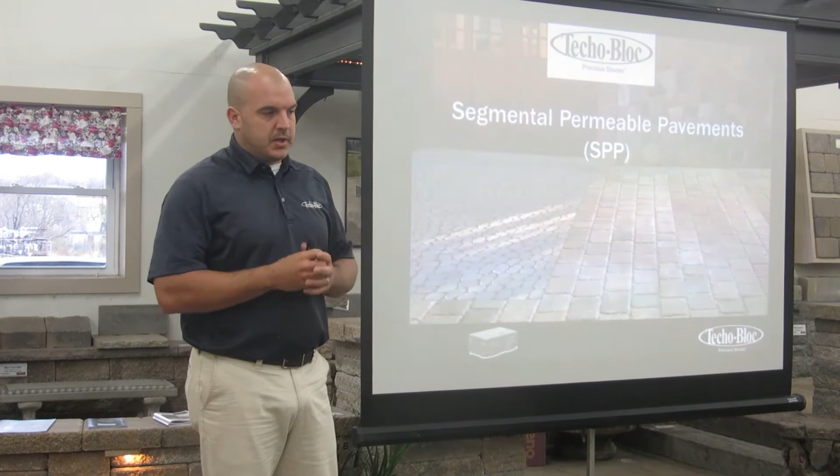Today, we're going to talk about segmental permeable pavements. This industry doubles, if not triples, every year, and will continue to do so. 15 years from now, there's probably not going to be a commercial job installed, a parking lot, that doesn't have some part of permeables in it. There's just too many benefits for it, which we'll get into today.

Why are we talking about this? Why is permeable pavement such a big thing? You guys are going to have to answer some questions today. This is a hands-on demo today, remember that. No, there is a hands-on.

But why, in all honesty, is permeable becoming such a big thing? Stormwater problems or runoff problems. Exactly. Runoff problems are what we're having from increased building. We're building new streets, new parking lots, new buildings, all the rooftops, all the asphalt is impervious coverage that now, when we get a rain event, instead of draining into the ground, it's running to our waterways. With it running to the waterways, it's getting too much, so we have erosion, it's carrying pollutants, so we're contaminating it, destroying it. So that's why permeable pavements are so big, and the industry's growing so fast, and it will continue to do so.

Locally, guys, in Lancaster, we are part of the Chesapeake Bay watershed. Lancaster City signed a big initiative to reduce stormwater runoff because we are in that Chesapeake Bay watershed. So you guys will start seeing this. I see some familiar faces that we've done some meetings with the city with. So it's here, and they're looking for guys to do this stuff and do it the right way, so it performs locally. And typically what happens is once they start going a couple and see the benefits, they're just going to mandate it everywhere, because there are so many benefits.

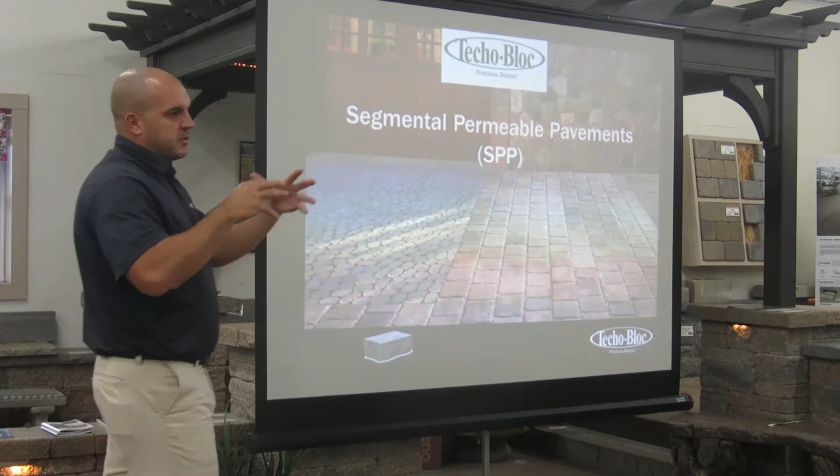There's a lot of cities in North Carolina, Asheville's a big one, but North Carolina State University is doing testing all over the state with the soils and all that. So now it keeps getting passed. In Charlotte, they're fighting it just because they haven't done one yet, but as soon as they do it, they'll start going. Chicago, I think, is up to 19 miles inside the city limits of alleyways that are permeable, and they have 100 scheduled this year. It just keeps going. So if Lancaster's already started the ball rolling, you're just going to see it keep increasing.

From the big cities, Philadelphia right now, all businesses are getting taxed on their runoff. All water that flows off their property into the stormwater system, they're getting taxed on. That's going to start increasing to the suburbs and eventually branch out to the homeowners too. So this is something we all have to be conscious about.

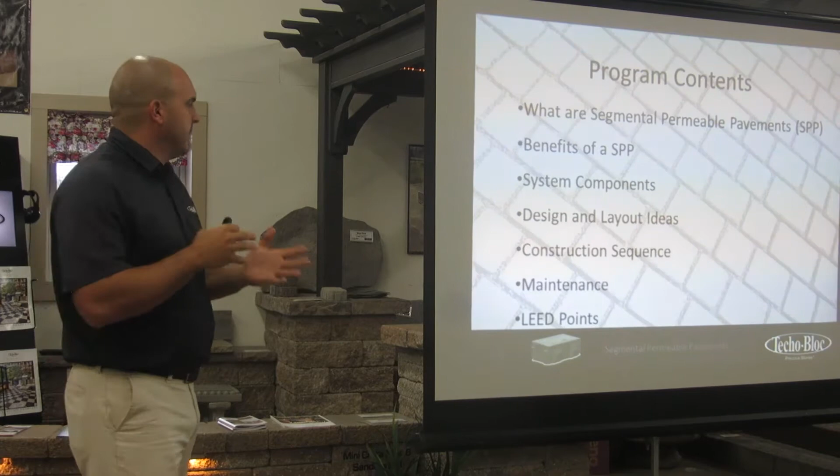So this program, we'll define what we'll call SPPs, segmental permeable pavements, the benefits, the components of the system. We'll go into the design layout, the construction sequence, maintenance on the system, and also LEED accreditation for different projects.

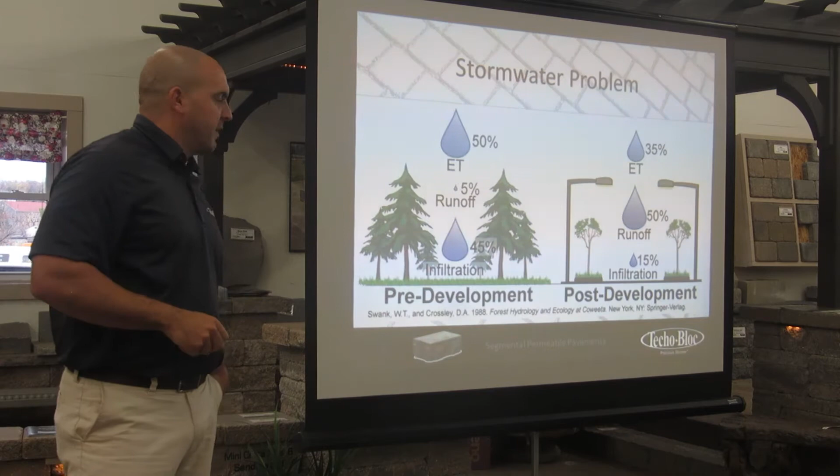So here's what we're talking about. On the left, you'll see what they call pre-development, before there was stuff built or impervious coverage built. But you have ET, which is evapotranspiration. That's water that's going to come back out of the ground from evaporation and through the roots back to the leaves and back into the air. You notice with pre-development, there's almost no runoff, it's only 5% because it drains through the ground. And then 45% of it infiltrates back, recharging our groundwater and actually cleaning the water as it does it. As it goes through the soil, it gets filtered and cleaned.

When we get to post-development, you can see the big thing here is runoff increases 10 times. 50% of the water now is just ran off, sent into stormwater management systems, sent right into waterways, causing erosion, all different types of problems as well.

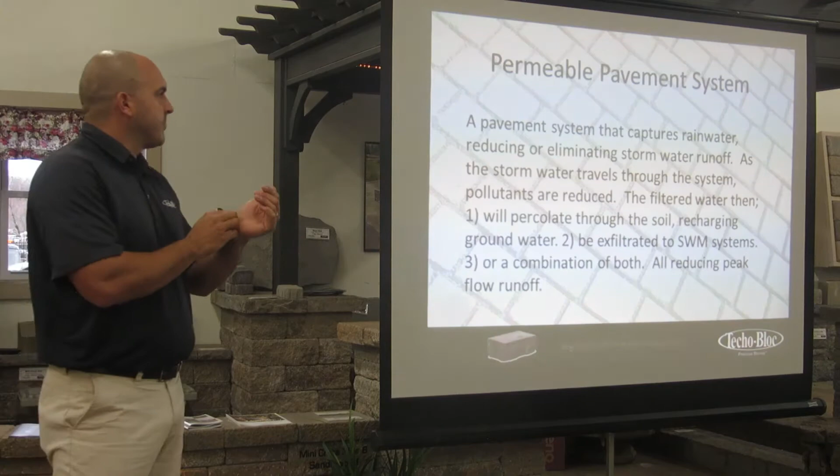We're going to read this, it's kind of a long description, but it's very important, so I'm just going to read it verbatim on what's on the screen. The definition for a permeable pavement system is a pavement system that captures rainwater, reducing or eliminating stormwater runoff as the stormwater travels through the system. Pollutants are reduced. The filtered water then will percolate through the soil, recharging groundwater, be exfiltrated to stormwater management systems, or a combination of both, all reducing peak flow runoff.

You guys understand what that means? Normal pavement, all the water is pretty much running off, shedding off. Permeable systems can capture almost all the water for lower intensity storms. And we'll go through the components and you'll see how it helps reducing that peak flow.

Sustainable design is development that meets the needs of the present without compromising the ability of future generations to meet their own needs. It's like the camping saying: leave it better than you found it. In the 70s and 80s, during industrial growth, we didn't care about this—we just built as fast as we could, screwing over the next generation. Now we're making sure that when we build, we're not destroying Mother Nature, so future generations can live off the land as well.

Stormwater management objectives include water quantity—accommodating overall water volumes and peak flow. We're trying to deal with the biggest storm possible. We need to contain that water, clean it, and exfiltrate it later on after peak flow, once all the water has gone through the stormwater system.

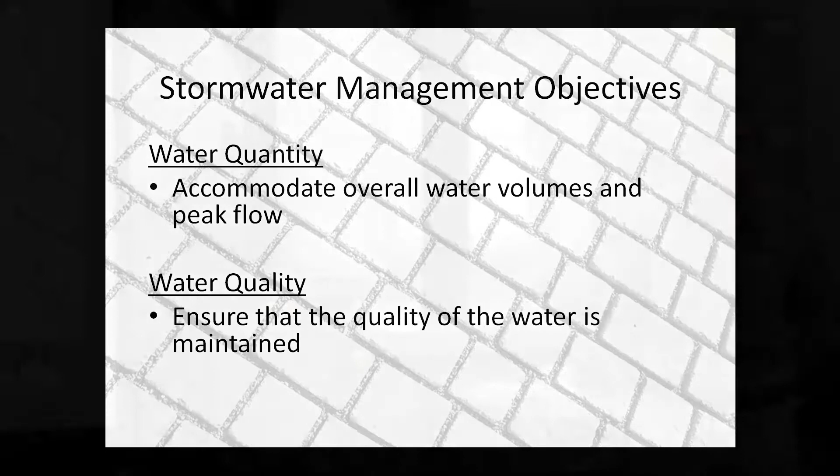The other important objective is water quality—ensuring it's maintained. There have been a lot of tests on these systems. The stones and microbial organisms eat bacteria, suspended solids, nitrates, and all kinds of pollution. They do a great job of cleaning the water.

Asphalt is an impermeable surface—all this runoff carries petroleums, heavy metals, and phosphates down into our stormwater system. Let's go look at a permeable pavement. I'm standing on a permeable pavement system, Permea from Techo-Bloc, looking for runoff during a rain event. There's none. All the sediment, petroleum distillates, heavy metals, and phosphates run through the system, filtered through the aggregate, down into the water table where they belong. A permeable pavement system—no runoff.

This video shows the difference in runoff with permeable pavement systems. There are about three slides of benefits—there's just a ton of them. Like mentioned before, once cities like Lancaster start seeing the benefits, they keep adding more and more.

It meets stormwater regulations as part of best management practice. We met with the DEP here last year—they have a manual about 200 pages long covering stormwater regulations in Pennsylvania, but there's only half a page for permeable pavements, and it's not even written correctly. They still have a lot of work to do to make it easier for engineers and municipalities to specify this. We talked with them about it, showed them everything, and did a presentation. I think they'll update it next year—they revise it every 10 years or so, and once that goes through, it'll help get more of this passed.

Another great benefit is it reduces runoff. Most low-intensity storms, no water will leave the system at all. It lowers our peak flow volumes, which reduces erosion.

Where I live in Charlotte, the development was built in 2007. On each side of my house is a culvert, so I have right-of-ways that are just drains off the road, going in behind to a stream behind my house. That stream is probably 7 feet deep, and there's probably normally 6 inches of water in it, just because all that water has eroded it and made it that deep.

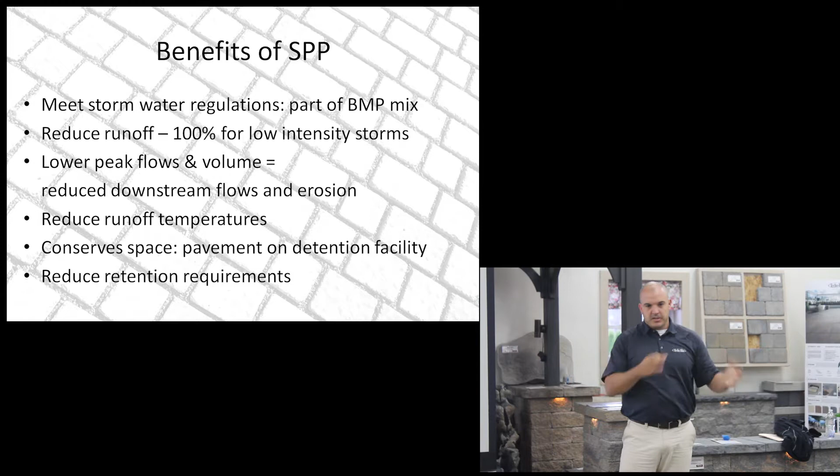Now when we get a rain event—we just had rain for about the last 9 days, but when it's too heavy, it floods. My whole backyard floods. That stream fills 7 feet high because all those houses and all those roadways are ran right to those inlets, right to that stream. It just keeps getting bigger and deeper. These permeable systems will reduce that.

It also reduces runoff temperatures. Think about a Walmart parking lot in the middle of summer—you drive on it and you can see that haze. That asphalt's extremely hot. Now think about a rain event: rain hits that, heats up that water, and sends it right to a waterway or stream. So it starts killing the fish and plant life in the stream because of the elevated temperatures.

As it works its way through the permeable pavement system, it allows water time to cool and helps reduce the temperatures. It also conserves space. Rick, you have a good story on that one?

Yeah, we did a big project up close to the Delaware River. It was about 85,000 square feet of permeable pavement a couple of years ago. I see some of you guys smiling—you'd love to have that job, wouldn't you?

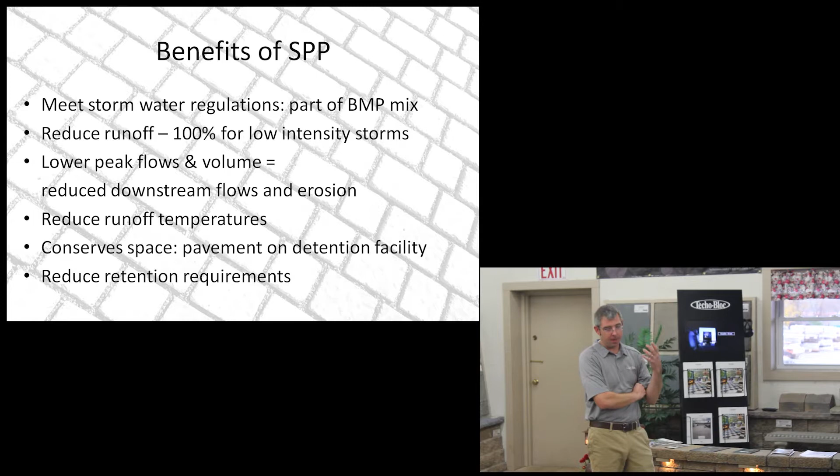But it was right on the river, and there was a lot of issues with clean water, so they needed that water to be cleaned when it was going out dumped close to the river. Another reason—they had a huge impervious coverage issue. They only had 20% buildable land, so they weren't able to build enough for their depot. By doing permeable pavements, we were able to clean the water, get more buildable space, and they had their detention area actually stored under the pavement. It was a really great project.

They needed a parking lot so big, but they also needed a detention pond. The site didn't allow for both, so they combined it—the detention pond is underneath the permeable pavement system. It was originally spec'd for permeable asphalt, but they found out the load rating wasn't enough to handle tractor trailer traffic, so we got it switched to permeable pavers, and it worked out really well.

More benefits: it contributes to maintaining hydraulic conditions. What that means is it allows the water to drain back through the soil, recharging our groundwater and purifying the water as it goes through.

Filters and reduces pollutants also. Like we said, the stone does a great job with those microorganisms, breaking down that bacteria and stuff that's coming through the system. Fewer drainage inlets where you're normally going to need a lot of storm drains and places to run that water. Permeable pavement, the whole pavement is a drain, so you're not going to need as many, maybe a couple potential overflow drains just in case the water comes up too high.

Reduces wastewater treatment costs. Again, you're not running all that stormwater to be treated.

It's visually more attractive than alternatives, so pavers are going to aesthetically look a lot better than asphalt or concrete, anything else like that. And it's an internationally proven system. We're not just pushing this in Eastern Pennsylvania, it's all over the place, all over the world. We're doing a lot of catch up as far as the U.S. integrating these systems. Other countries are leaps and bounds ahead of us as far as using permeable pavers.

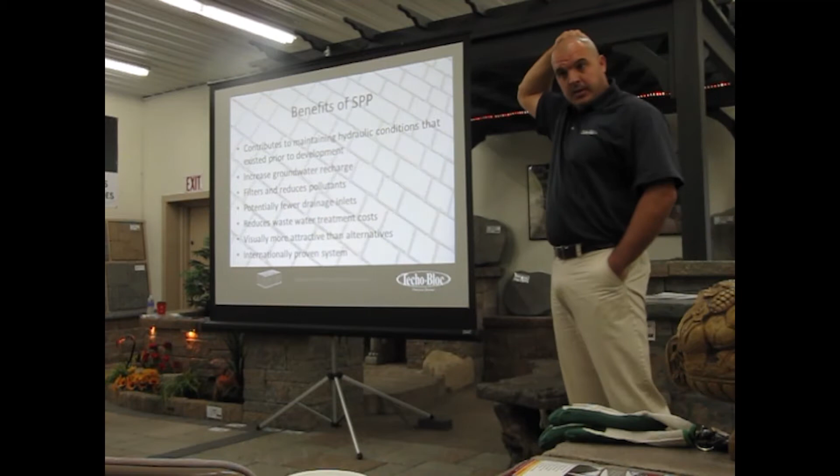This one here, I think, is important, especially to Lancaster City. They're having a lot of problems with it flooding. So they built these water treatment systems 20, 30 years ago to handle what they thought was going to be built. And now a lot more has been built, so to replace it is not an easy fix.

It's the inlets we see on the road, which is then piped under the streets. So to fix that means rip up every street, and it's in the hundreds of millions of dollars to do this. So what are they going to do? They're going to start taxing, like they do businesses and residents, for the lot sizes you have, making you do permeable driveways or you get taxed on it, stuff like that, because it's such a big expense. It's not a quick, easy fix, it's in the hundreds of millions of dollars to fix it.

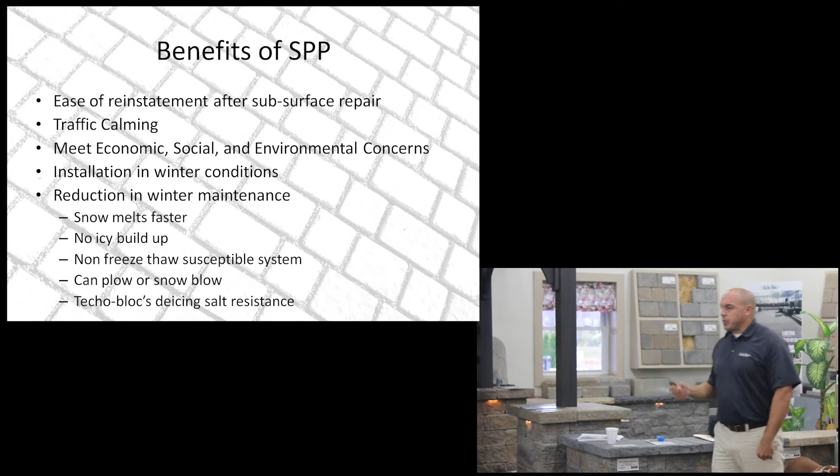Other benefits: ease of reinstatement. Obviously it's just like anything interlocking, we can pull the section out we need to if we need to do repairs underneath. It gives traffic calming. When you see those big segmented pieces and the joints in between, people automatically slow down because you're expecting it to be bumpy, and then it does make a noise. So they don't even recommend it be installed where the speed is 35 miles an hour maximum, because of the sound it becomes so loud in the vehicle going over it. So it does traffic calming, and meets the economic, social, and environmental concerns, which we'll get into.

A great thing for this climate is you can install it in the winter. We're using all open graded aggregates, so they're not going to freeze like the 2A modified, 2940 stone would. It's open graded stone, so it can be installed. If it was raining today, we would still do the hands-on because you can install it in the rain. There's no saturation of the stone we're installing when we're doing it, unlike with your crushed stone that has fines. It can be installed year-round.

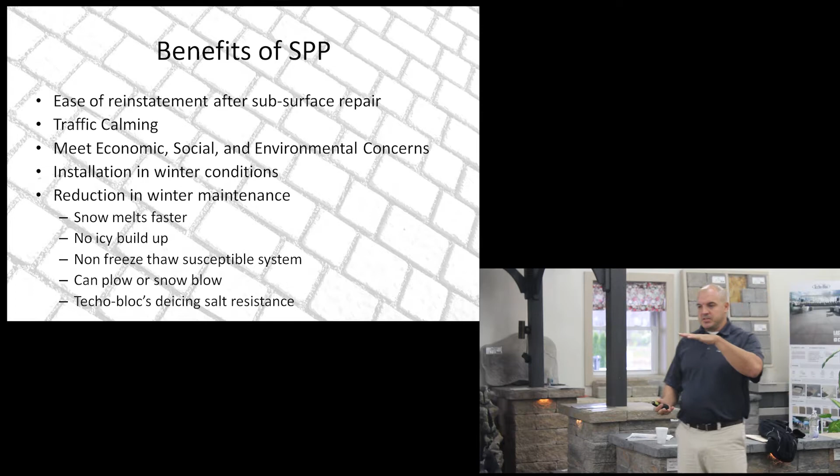It actually reduces winter maintenance as well. How many guys plow in the winter, how many guys do the salting with it as well? Well, with this, we get ice because it melts and then freezes. With this system, as it melts, it'll drain through the system. Typically for commercial applications, the base of the system is probably around 2 feet. They've done research, I think in Chicago or Wisconsin, and we'll get into the different layers, but the sub-base never got below 36 degrees, the base layer never got below 34, and the bedding layer never got below 32. So it never got below freezing. It always had air underneath circulating with the geothermal temperatures to help melt the snow on top and come down through it. And you can plow it, you can salt it.

The only thing you don't want to do is put sand in it, because that can clog the system. You can actually put the joint fill material right on top of it, the same material we'll use today to give traction, and it'll just fill back in.

I got a question. How about, like in the city now, they're starting to put in the melt-the-snow systems. How would this work with that? Because of the installation they put in, how's the water level run? You talking about a heated element, a heated system?

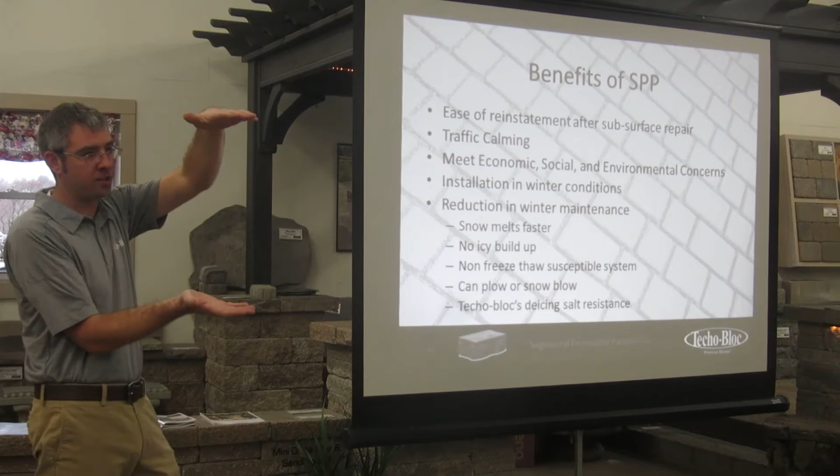We did a showcase project with it a couple years ago. It's not needed as much because with some of these systems you have 2 feet of excavation, and what you get is a geothermal effect. The ground 2 feet deep is a lot warmer than it is at surface temperature, so that heat will actually rise through the open system and help melt some of the snow in the joints. It's not going to melt a foot of snow on top, but it does help.

That's what I mean, when they're installing that, how's this drainage going to work with that, because they're putting concrete over top of that and then setting the pavers? You could lay it in clean stone - that membrane or that mat could lay in clean stone. You could put it in the open graded aggregate. That's what we did when we did that project.

Yeah, go on our YouTube page, there's some videos on that project. I think we did it about 3 years ago, I believe.

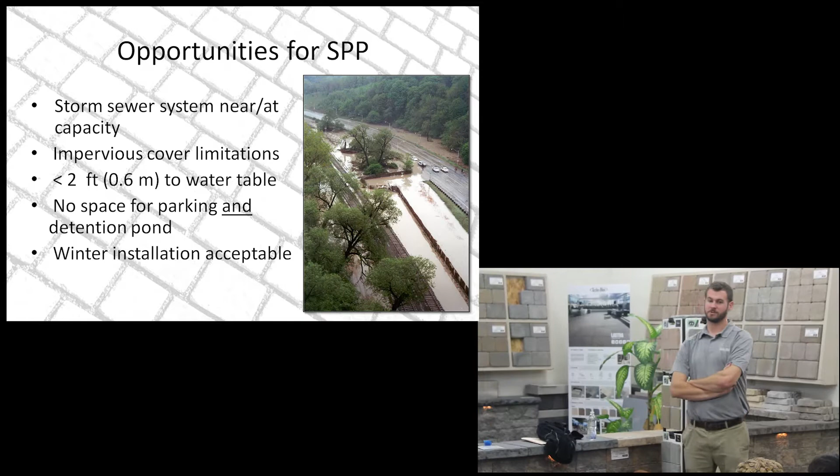Some opportunities that arise: storm sewer system at capacity, which I think is what Lancaster's run into - it just can't take the water anymore because of the development. You meet your impervious coverage limitations, which Lancaster's passing as well. There's different municipalities in the area, anywhere from some will give you 50, 60, up to 80% usually back on the lot. And when we did a lot of installs in Mechanicsburg and Carlisle...

Mechanicsburg had a lot of those. They built these huge houses on these small lots. People couldn't put a patio in their backyard once their house was built and their driveway was in, because they met their limit already. I think Silver Spring and Hampden, over towards Harrisburg, it's 30% impervious that you're allowed.

So they're saying that 70% of your lot must be vegetative. So you've got to remember, if you're installing permeable pavements, getting back that percentage, you can install or build a pool or build a shed or put whatever you want on your property. You're just counteracting that impervious coverage.

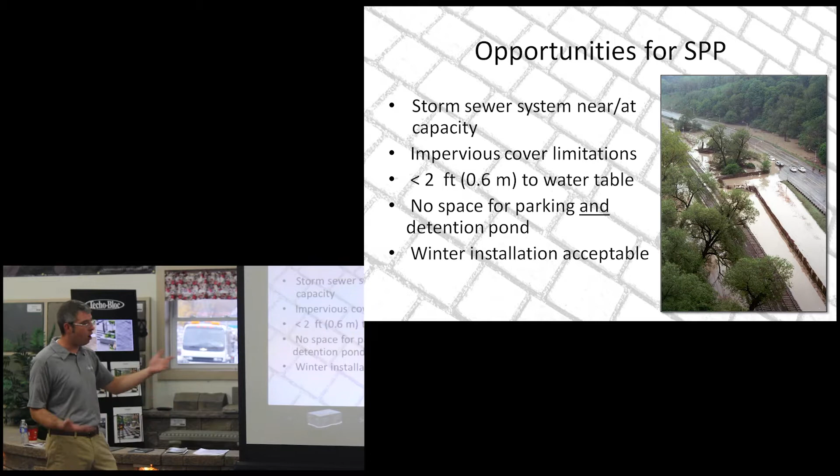No space for parking and a detention pond. You see these big properties, they have to have an acre for a detention area, chain link fence, weeds growing 8 feet high. All that water can be stored underneath the pavement, so that can actually become usable space for some of these developers, which is a great thing. And like Jesse said, winter installation is more than acceptable because you're dealing with open graded aggregate.

What we have here is an overhead view of a typical permeable pavement system. There's a couple things too that we recommend a little bit different than some of the other manufacturers in the industry. We recommend having an elevated curb along the outside, and that's there for a couple reasons.

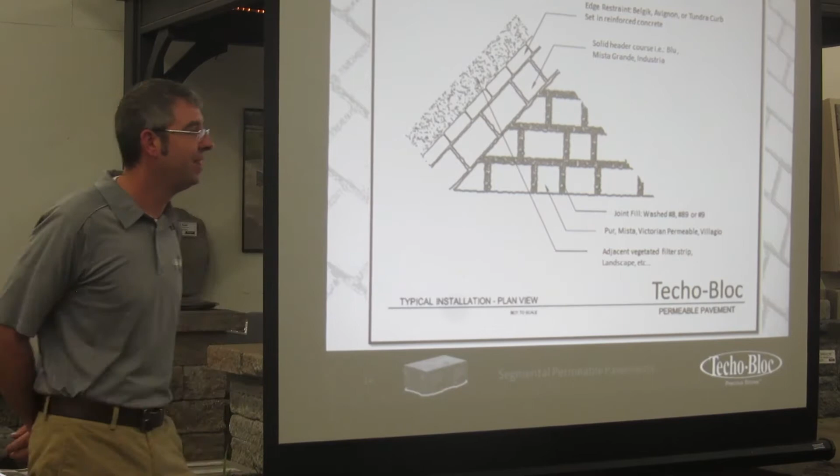Number one, when you're dealing with clean stone, you can't drive regular PVC type edging in place, just because you have open stone - you can take that spike and push it in with your palm. So you need to have either some kind of a concreted-in curb or a full bed depth curb encapsulating all that system, because if you can push it in with your palm, you can pull it right back out, so it won't hold anything. It will not do good as an edge restraint.

Yeah, go ahead. So even that grid with an edge piece on it, I used that on one job and I don't think that holds either. It's kind of hard to work with because that has a memory, like when it comes rolled up, so when you try to pull it out, you've got 4 guys trying to hold this thing down as you're putting pavers on top of it.

That might work out better for maybe some walkways, non-vehicular traffic. But we always try to recommend some kind of a concreted in curb, especially with any type of vehicular traffic. That type of stuff for walkways may work, but it may be too time consuming to even mess with. Most of the time it's going to come down to concrete or using a precast curb reinforced with concrete or rebar behind it.

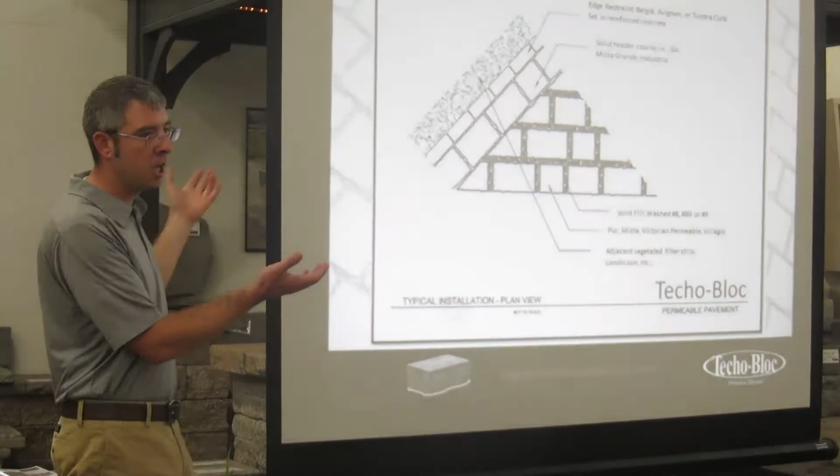The other reason we recommend an elevated curb is because what's going to be behind your system could be grass, could be mulch beds, could be flower beds, could be anything. When they're doing maintenance on that, there's always the potential to blow stuff into the system. And that's the biggest thing we're trying to prevent on permeable pavement systems, is not getting grass clippings or any kind of debris into the system, because there's potential to clog that area.

Something else we recommend is a solid, non-permeable header course along the outside. You guys ever see curbs? Where does the debris and dirt and dust and grass clippings always collect? It always collects against the curb. Especially this time of year, leaves will just blow and get trapped right there. By having a non-permeable border on the outside, a tighter joint product, there's a lot less chance for that sediment to get into the system.

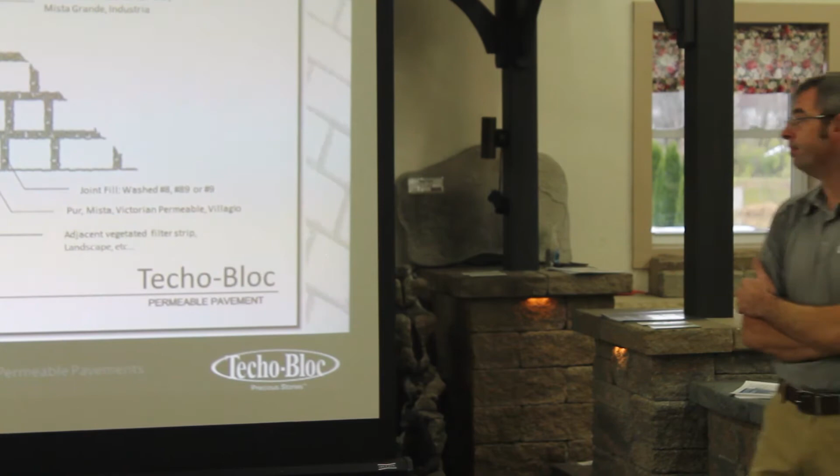So starting off the system components, the difference between this and interlocking concrete pavement starts at the very beginning. Because typically, if this is interlocking concrete pavement, what are we doing to our subgrade soil? It's the first thing we're going to do. When doing standard interlocking pavements, you always compact the soil.

Obviously, with permeable pavements, you don't want to compact it. You guys know why you don't compact it? If you compact it, the water will puddle. Yeah, it pretty much tightens up those clay particles or soil particles, so it lowers the infiltration rate of that soil. When we're doing compaction, what we're actually doing is mechanically tightening that and getting all the air pockets out so we can start compaction from the base up.

We want those air pockets. We want that water to be able to drain down back into the soil. So we don't compact. You can also do what they call scarify, where they take the teeth of your backhoe or skid loader and drag it back to cause grooves, which creates surface area to allow more water to drain in. I think they did this on the outside project here. We'll pull it back and get to see it. So that's where it first starts different.

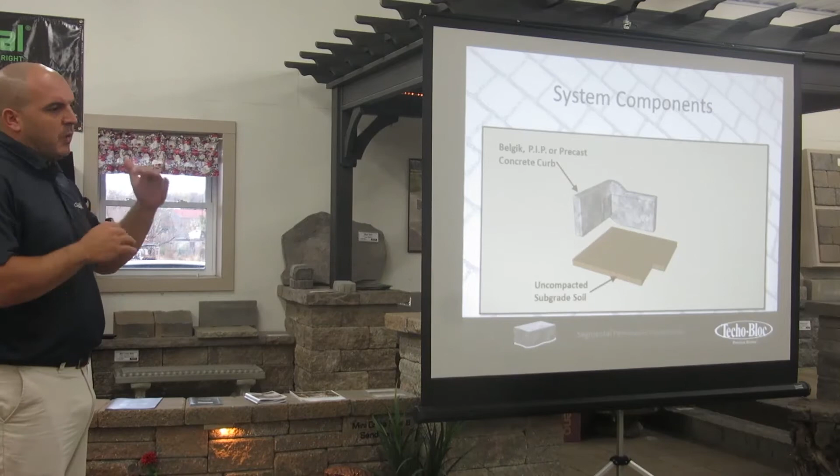Next is this curbing. Depending on what you're doing, typically the curbing's not going to go down actually to the sub base. It'll probably be above the sub base, depending on what installation we're doing. If it's a high traffic commercial parking lot with a lot of ESAL loads on it, it may go down that far, probably a minimum of 12 to 16 inch curb that they put in. If it's a residential driveway, obviously it probably doesn't need to be something near that thick. A walkway wouldn't have to be that thick as well.

Next thing is geotextile. We always recommend using a woven geotextile fabric between the soil and the stone. Geotextile fabric is there for two reasons. Number one, it prevents that soil from mixing with your stone. Number two, it has some biaxial holding capabilities too, so it has strength in both directions. If you get some minor settlement because you're not compacting that soil, it's there to help bridge those areas.

And with permeables, there's actually a third reason it's put in. That fabric, and we'll see it out here, is a filter layer. So bacteria will grow on that. There's a guy, Brian Shackel, who wrote a book years back on the study of permeables, and in it, that fabric grows bacteria, so now it becomes a filter layer. As the water is going through, it's going through that bacteria, and that's what's eating the pollutants and stuff as it goes through. Think of it like a pond filter or something like that.

You know, you put those chemicals and bacteria in for your ponds. It's kind of a similar idea.

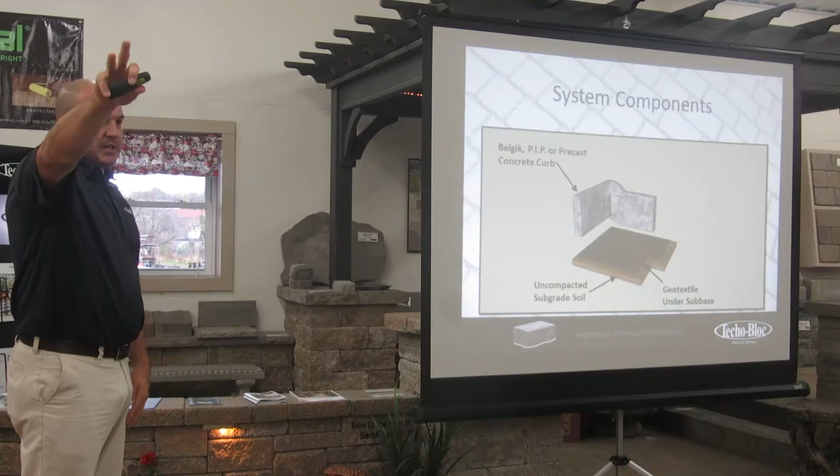There's different types, and it's important. Mirafi, who makes it, I have a sample set of it. They probably have 9 different types, and some say right on it, just for separation, not for infiltration. So you've got to make sure you're using the right type.

Another thing to remember about these systems is they usually have an engineered drawing, because the sub base changes depending on traffic and what we're trying to do. They'll specify exactly what geotextile you should use, and the depth of your sub base, if there is one. It's not just like your typical patio.

If you're going to do residential projects here, get it done once, because your soil conditions are typically the same. So you can use it for all the driveways and patios you do. Get it done once, have it, so you know you're installing it right for the soil conditions.

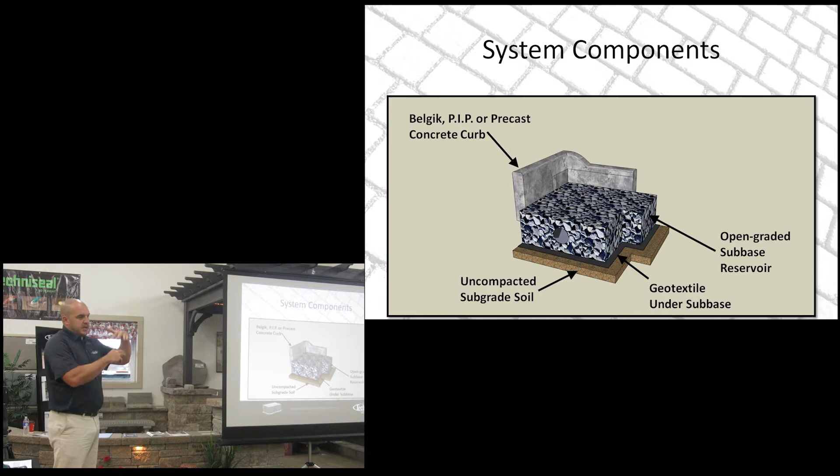Next, this is our sub-base, a number 2 to 3 size stone. This is what varies in base thickness of the installation, and what determines its thickness is soil conditions, what type of soil, loads that will be going on top, the amount of ESAL loads, or what type of traffic it will be. If we're trying to store water in it, we'll determine how thick we build it. I think that's probably about it, but yeah, this is what varies in the system, the sub-base.

This can be somewhat difficult to find. 2s and 3s can be hard to find washed. All the aggregates we're dealing with, we want to make sure they're washed, just because you don't want to put more fines into the system - you don't want it to fail prematurely from dirty aggregate. So check with your local quarries and suppliers to make sure you can get this washed.

A lot of projects I've seen actually substitute 57 stone for the full layer instead of using a sub-base. If you're doing residential projects, that's probably what you end up doing - just a 57 base layer, maybe with an intermittent layer of geotextile or biaxial grid in between to help stabilize the stone. But like Rick said, this is almost impossible to find washed - we'll go out today, see the rock they have, pick one up, and your hand will be covered in dirt. They're just hard to get washed.

What's the percentage void space on a normal 2s and 3s? Is it 35 to 40%? They want it to be 40, but it ranges 35 to 45. I think you're allowed down to 32, but they prefer right around 40.

What is 57 then? Same - it's just the size of the rock. And typically the question he asked, what's the void space, is very important. It's typically between 35 and 45%. They want you close to 40 if at all possible, to allow that water in.

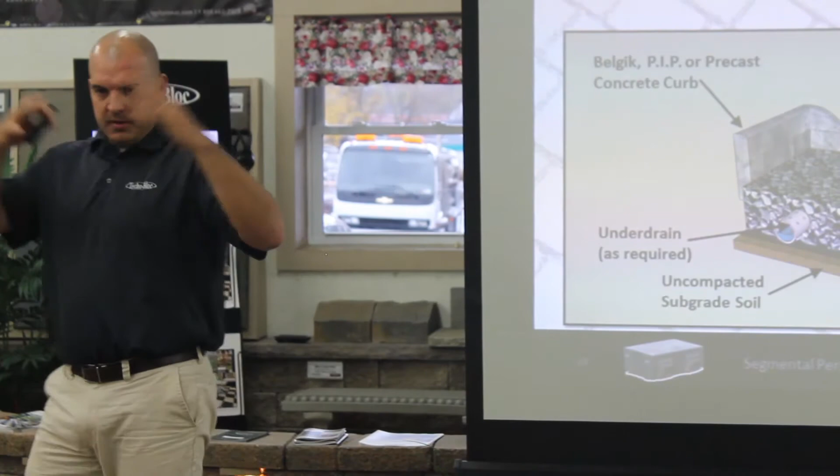And those void spaces are what allow us to install it in the winter and stop it from heaving and breaking down like asphalt does. Because as water gets in the system and freezes in those voids, it's not pushing the rock - it'll actually freeze in those void spaces without causing it to move.

The quarry you buy your aggregates from can provide a report with all that information - not just can, they have to. If they're selling it as 57 stone, they have to have the report on it with the gradation.

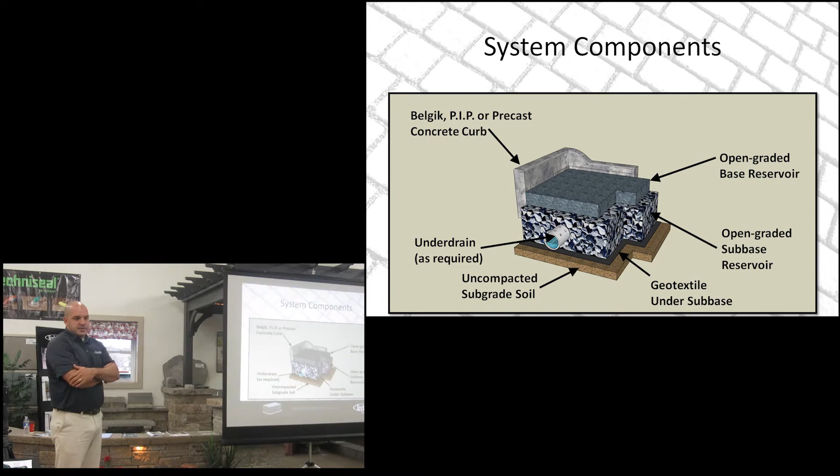Next that can be installed is our base layer. This is typically 4 inches, and it's a number 57 stone that they put in.

Here, what you can do is actually put in between these two layers another layer of geotextile fabric, because we're going from a big size - the 2s and 3s is probably about the size of my fist - down to 57, which is 3/4 inch stone.

So they're going to weave in between and fill that, and they'll eventually choke out. They call it the choke factor of it. We just don't know exactly what that will be. So we need to compact to get that to choke out, or we can put a layer of geotextile fabric in between it, and then we know it's already at its choke point if you do it.

So there's 2 different ways you can do it as well. Optional biaxial grid and base. This isn't just a regular geogrid. They're specified sometimes as a geotextile with the geogrid attached to it, but this is an engineered product. If you're dealing with that, you're definitely going to have this project engineered. What that does is it provides some more structural support in that base. Maybe if you had some more load you had to deal with, additional traffic, that might be something an engineer might include.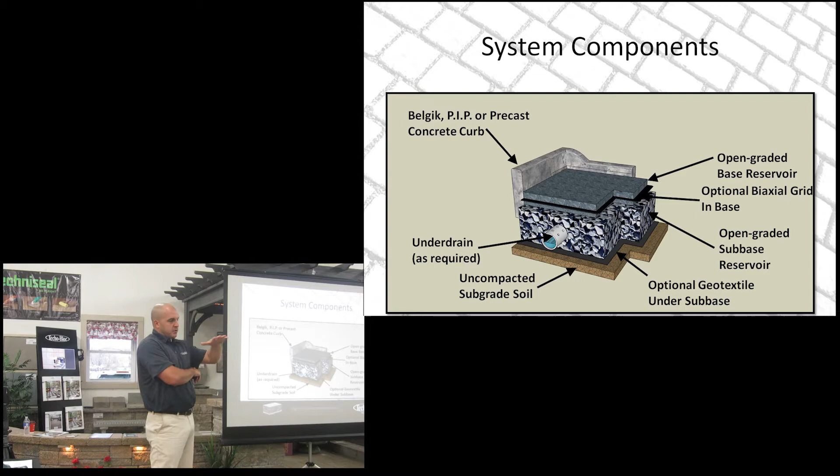And then you get into bigger projects, that's something you want to look into. I had a job that a contractor did for us that was 7,500 square feet. It was just a regular driveway, not permeable. But they saved $9,000 worth of stone, plus all the labor of compacting, by getting a layer of this added. They reduced the stone by half. An engineer designed it to take it out because it just adds that much strength to it and saves them that much money. I think the grid cost them $1,000, so they're up just in cost alone $8,000.

And think of that as value engineering. You might think it's expensive to hire an engineer, but if they can save you that much money on that project, it's definitely worth it.

Next is the bedding course. We recommend 2 inches of number 8, which you guys call 1B, I think, around here, right? And that's going to be your setting bed. Regular pavers, you use sand. With this, you're going to use a number 8 stone instead.

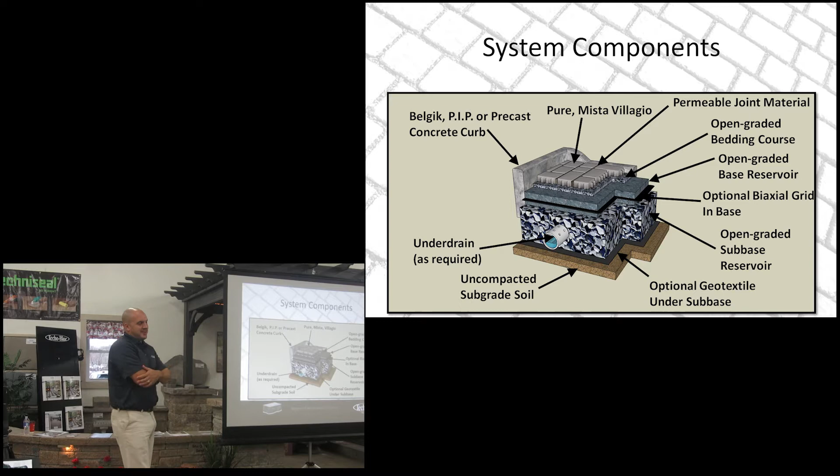And then here we'll install the permeable pavers on top. You can only use Techo-Bloc pavers for permeable pavements, no, I don't want to say that. And the pavers themselves are not permeable. The system is what's permeable. And here is another place where it changes from interlocking.

At this point, we do not do compaction because we're not seating the stone up through. We'll actually do our joint fill material first. Once that's put in, then we'll do a run of compaction over top to consolidate that joint fill material in between those, and then we'll install more stone if needed.

This is just a picture showing you how it works. Rain enters, and as you can see, so here's where we were talking about heat flow and allowing the water to cool down. You can see as the rain comes, typically if this is impervious coverage, the rain hits and is ran right through the inlet. Now it's got to drain down through all these different layers, and this has a pipe system, so it's a partial infiltration system.

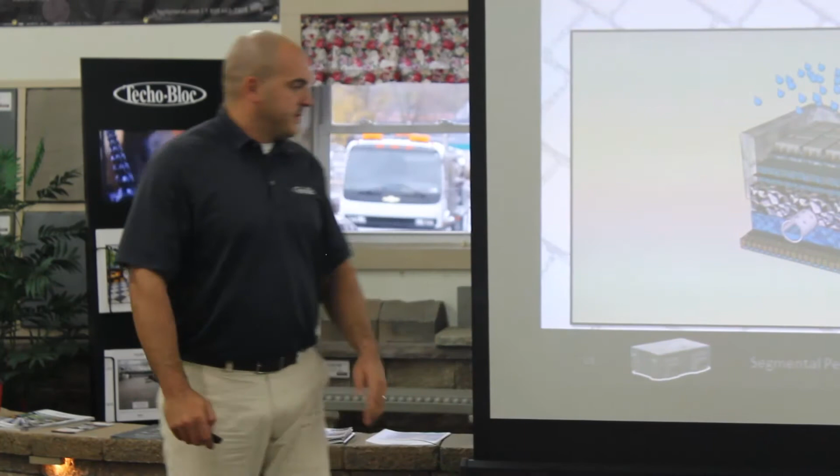Holes should be down generally, or whatever the engineer says. If the engineer says put the holes up on the pipe, put them up, but typically we recommend the holes to be down. Because the water's filling from the bottom, it's going to enter the holes and then be able to flow out. So the water will drain down through.

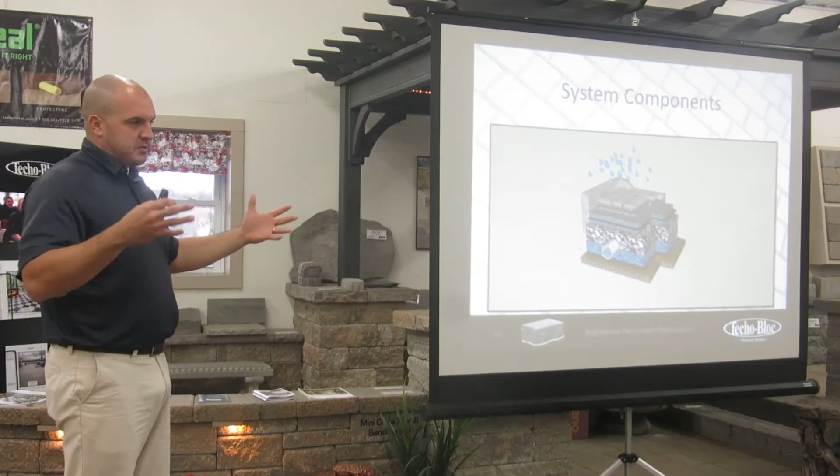As it's draining down through, it's passing all those rocks, so your heavy metals, the total suspended solids, pollutants are sticking to those rocks as it's working its way down. And then we'll go through all these different rocks, get down here. Some of the water, typically here it's going to be clay, so some will drain and some will get exfiltrated out. So it'll build back up and then get out to the system, which is hours later. So it stops at peak flow, helps with erosion, stops overloading the stormwater management system because of the time it takes, and also cleans it and cools the water, gives it time to cool off.

Question: is there any studies on it? You say all the contaminants cling to the rocks. Is there any studies where they have actually ripped up old permeable pavement and been able to test how much actually stays? They actually test the water as it comes out. I believe it's in here.

This is one case study, but it shows you the different ones. There's a huge one going on right now in Wisconsin with a bunch of people involved. They have the water go through porous asphalt, pervious concrete, and permeable pavers, and then the water enters the system which has all types of testing equipment, so water comes out. You can actually view it live, log in, and see rain going through it showing how well each system is cleaning the water. There's a lot of different case studies on the cleaning of it.

Now that pipe you have below, what if you don't have a place to go with that? Most systems in this area are going to have some kind of exfiltration pipe because we're building in clay soil, and clay has very low infiltration. Where do you daylight that pipe, or don't you? It's going to have to be daylighted somewhere. It could eventually tie into the stormwater system, but remember, it's coming out after that peak flow, after the water's cooled down. Or if it's a leach field, you just get it away and dig a big pit where it can store water. But what if I can't daylight it at all, if I'm down in grade?

This just goes through the gradation size. It's typically between 3 and 2.5 inch size stone for our 2s and 3s. The 57 is 1 inch to 3/4 inch size stone. Number 8 is 3/8 inch.

This is all our information for all of our permeable pavers. I think Chris might have included some of the studies - are they in there? I have, if any of you guys are interested in infiltration studies, some copies printed out. We have an independent engineering firm come in - we recently tested 4 new products: Blu, Pure, Antika, and Inflo Victorian, for permeable commercial also. We did all these tests in Pennsylvania.

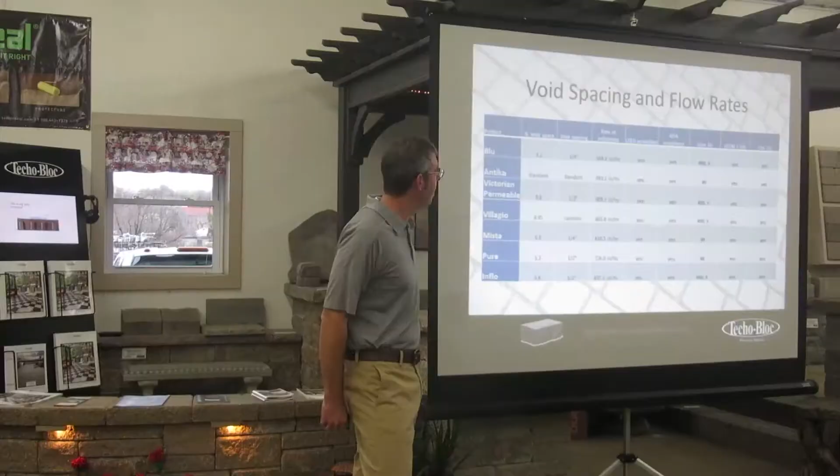A lot of times engineering companies, if they're engineering your job, will ask you what the infiltration rates are. So I have all the information - if anybody wants it, there's copies over there, grab one, or email me and I'll send you a PDF. There's some good data - it's got the void spacing for all the products, the actual percentage of void in there, which the engineer is going to ask for, and joint opening size - they're all ADA compliant joint openings. The rate of infiltration - look at Antika, 993.2 inches an hour. That's huge.

Our worst one's Blu, at 569. So if we say that's at 90% clogged, it's still going to take 56, or if we say 99% clogged, it's still going to take 5.6 inches of rain per hour, which is a lot of rain.

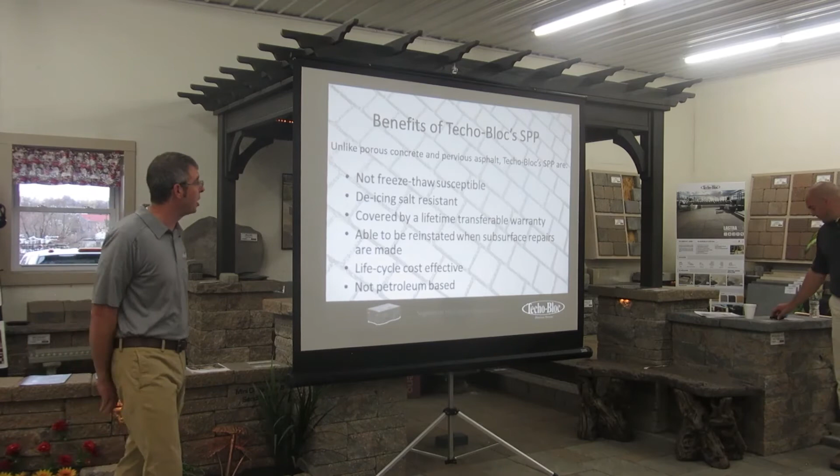At 90% clogged, if we're getting that much rain, we should be building an ark, not building a permeable pavement. Some benefits of segmental permeable pavement: non-freeze thaw susceptible. Just because you have open graded aggregate, it doesn't have the fines to capture that water, so you don't have to worry about heaving like you would in a traditional interlocking system. De-icing salt resistant - all of our products have a de-icing salt resistance warranty, and they're covered by a transferable lifetime warranty as well.

It's able to be reinstated when subsurface repairs are made. Like we talked about earlier, it's super easy to unzip, take a few pieces out, dig down, fix it, reinstate the stone, and put the system back together. With concrete or asphalt, that's a lot more difficult, and you're always going to see an ugly patch there.

I was just in Louisiana last week, and they had roadways where they put new piping in. They just cut through the concrete, replaced the piping, and put permeable pavement back on top. Because it's open graded stone, they'd run a compactor over it and didn't have to worry about backfilling or settling it - the water could just drain right down and get out. So they were making repairs and installing this over top, knowing if they have to make repairs in the future, they can just rip it right out and put it back in. The big difference with porous concrete or porous asphalt is once that's clogged, it's clogged.

You got to tear it all up. With our systems, this is the issue we kind of fight a lot - we get lumped into the porous concrete BMP. If you look at the DEP's BMP manual, we're lumped into that category, but we're really not that system. Our pavers are all 3 to 4% flow through rate, so we're not a porous product.

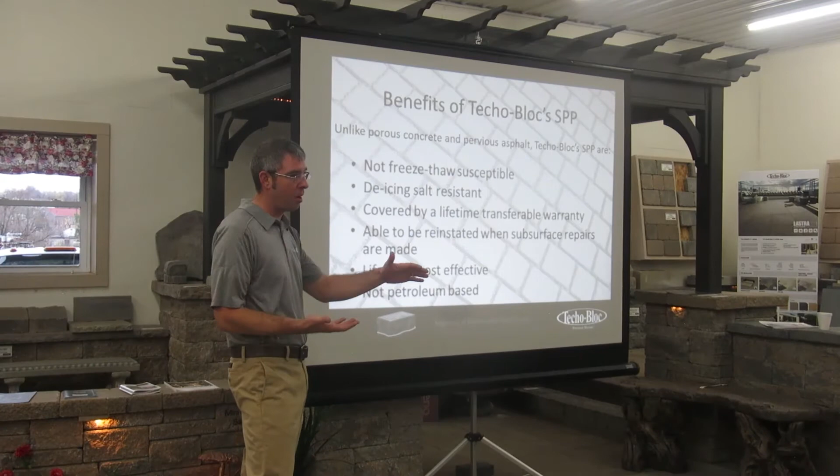Not being petroleum based is another huge one too. We're talking about doing all this stuff to clean the environment, clean the rainwater, get rid of heavy solids, all that kind of stuff - if you use permeable asphalt, you're using an oil-based product, so it's kind of counteractive. It's really not working out.

They're all ADA compliant. Actually, we're going to install Pure. We used to have Permea, and the joint was too big, so that's why we redesigned it, made it tighter, so it's firm, stable, and skid resistant. No open joints larger than a half inch.

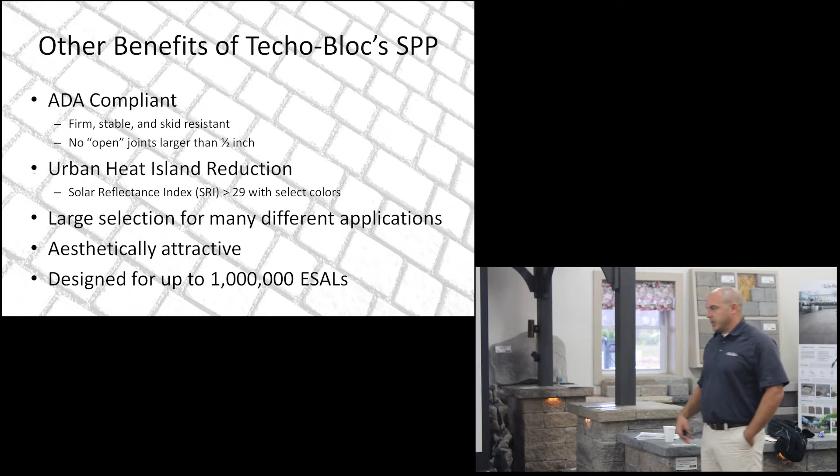This reduces the urban heat island effect, which is for LEED credits. There's a large selection with many different applications. It's attractive looking, and it's designed to hold up to 1 million ESAL loads.

An ESAL load, in layman's terms, 50,000 ESAL loads is equivalent to a triaxle truck on a road 7 times a day for 20 years. That's the equivalent of 50,000 ESAL loads, so you can put that in comparison as well.

Maximizing pollution reduction, there are a couple different options. One is a sand filter under the base. What they're doing is essentially screening in a little bit of sand just to capture what they call the first flush, or a courtesy flush, as we might like to say.

So you're going to have a bunch of fines on that stone, and as that water comes through, it's going to pull some of those fines in. If there's too much fines, it can actually clog the whole system. If there's a little bit of a sand layer, that's going to act like a sand filter on the pool and actually capture some of those fines and prevent it from clogging your system.

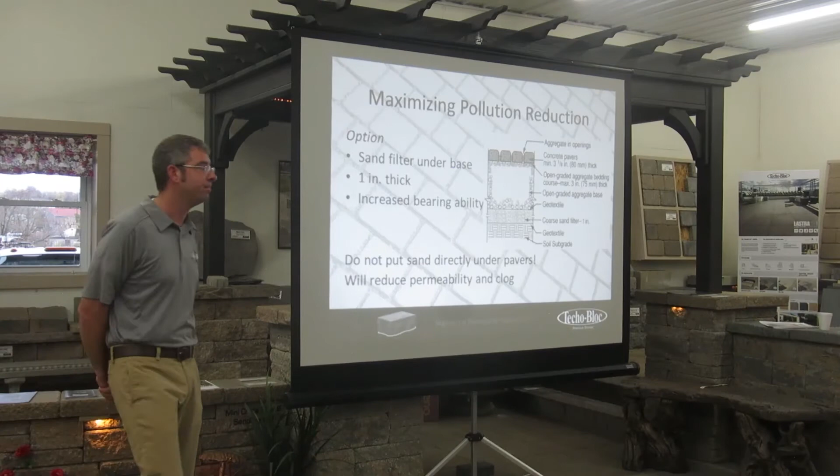Subgrade infiltration testing is done to check your different soils and how well they drain. There are 3 different types of systems, and we'll get into them a little bit later. They want the soil to be able to take half an inch of rain per hour for it to be a full infiltration system, meaning a system without any pipe — it has to be able to take that. They don't want water stored in the subbase layer more than 48 hours, so that's what they'll test the soil for, to see how long it takes to drain, and that determines where the pipe goes in the subbase along with the number 2s and 3s. You can also get different lab reports and soil maps to see where you're at.

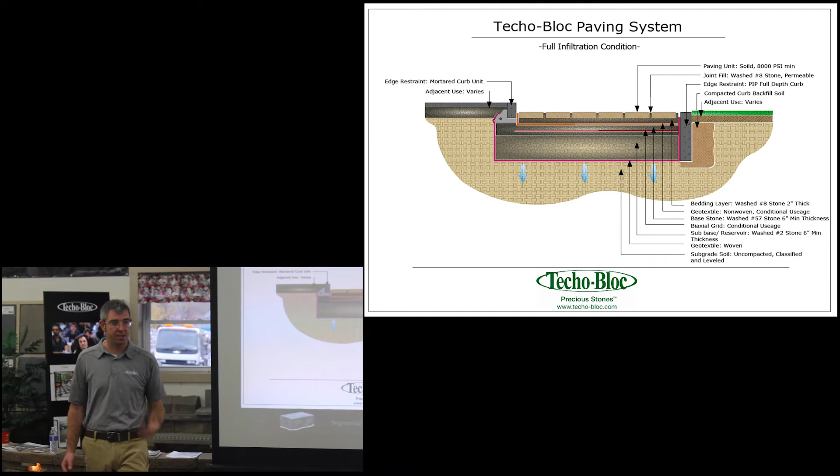This is a full infiltration installation. Now what you have here is no exfiltration pipe — all the water going through the system goes back into the soil. Typically this isn't done in clay soils at all; this is done with sandy soils.

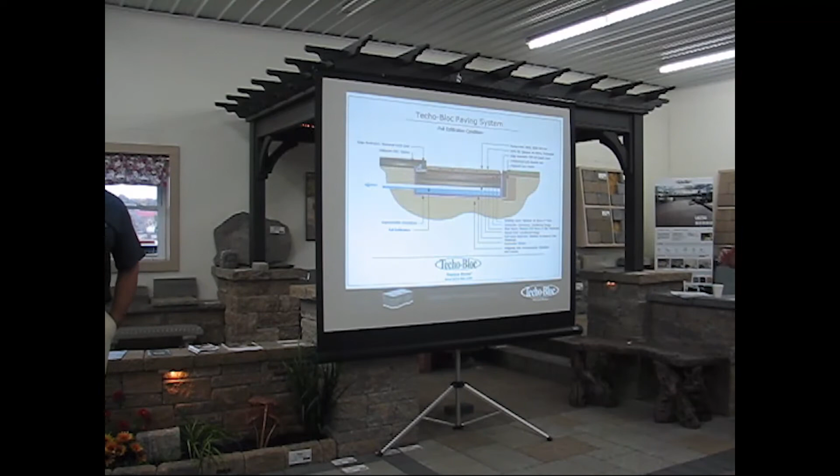So, a little interesting — third is full exfiltration. This is where none of the water goes back into the soil. These are done a lot of times on brownfields, where it used to be a gas station or had pollution, and they don't want that water to come through and cause more damage by pulling more pollutants out of the soil. It's also done when they want to reuse the water for gray water — toilet flushing, car washing, watering plants, like we were talking about earlier. Instead of using a geotextile, they'll use something like an EPDM or PVC pond liner essentially, just to hold and capture all that water.

This is also done when groundwater is within 100 feet, because they don't want it entering the system since it may not be totally clean as it passes through. Or if the water table is within 2 feet, or there's bedrock, obviously none of that is going to drain, so we won't need the pond liner. We just know water's not going to go through, so we'll need to exfiltrate all of it. At that point we can compact the subbase since it's not taking water anyway, so we do it for stability as we build the system.

Question: back to the infiltration systems, what's with the water not sitting in there for 48 hours? They just want it out, that's the design from the ICPI.

I think it has to do with stability. If water sits on top of that soil all the time, it's going to be completely mucky and always holding water, so repetitive traffic might create enough pressure to distort the pavement or cause settlement. Limestone areas are often sinkhole areas too. Would that play in as well? Potentially, but there's not as much runoff there, it's going to be holding the water rather than constantly flowing and running off, so I don't think there'd be as much issue there.

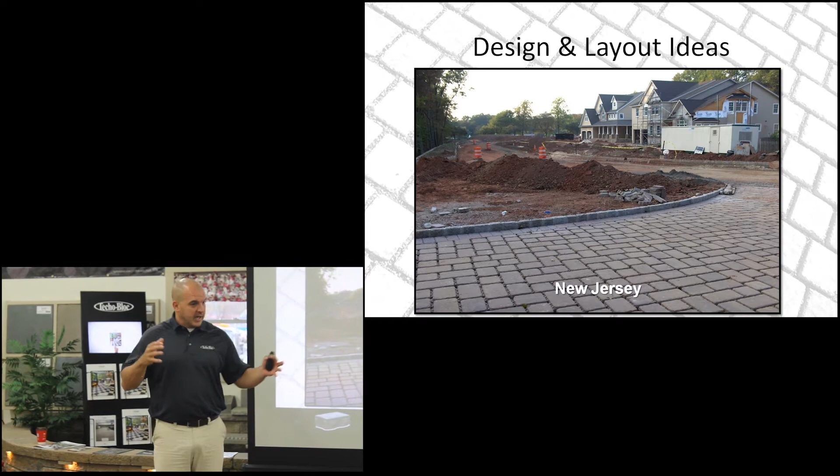What's the problem though? If we're not to that point, the joint fills aren't filled in yet, and we get it contaminated during the construction process, it clogs underneath and we've got to rip it all back out. So it's very important during construction of segmental permeable pavements to keep everything clean as we're bringing materials in, because if it clogs underneath, it all has to be ripped back out. So it's important to keep that in mind as we're building it. Here too, this road is just a dirt road, so we're sure contaminants are getting into the system, so we want to keep erosion control in mind during construction.

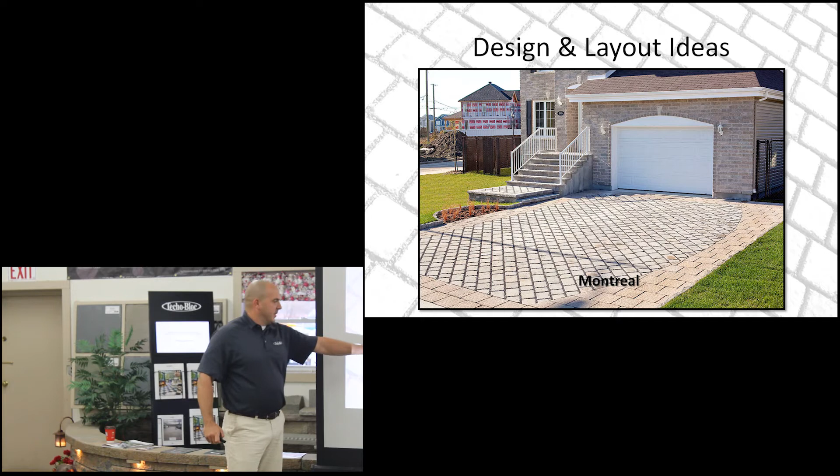But that's this whole project, and the one you saw Pete on, that's a YouTube video as well, multiple videos showing a rain garden, which can take overflow. This system actually has what we talked about, where water is trapped underneath with a pond and pump, so they can do irrigation and water the plants, all of that.

This was built side by side with a regular interlocking driveway. They did a permeable driveway at the same time for comparison, and found it was about 15-20% less expensive to build permeable, and a lot quicker too.

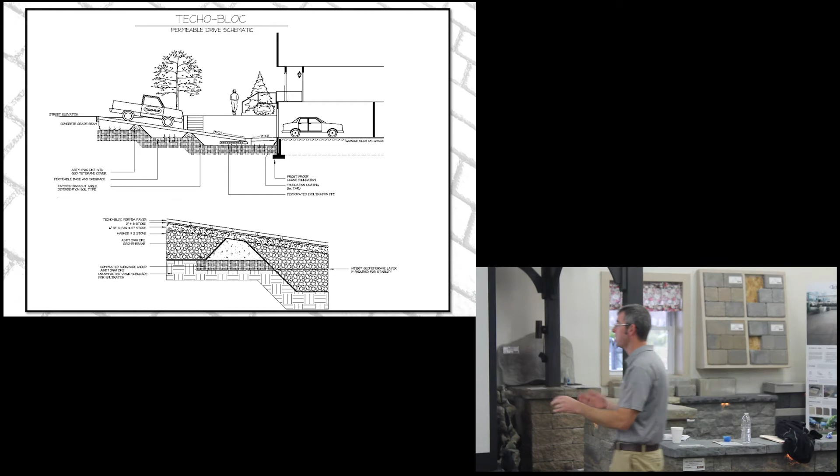People always say you have to build permeable pavements level, that you can't build them on high slopes, but there are a couple different things you can do. You can install dikes, sometimes pouring concrete or using a densely graded aggregate like 2A modified, and build up so that water fills up different areas. There are three different containment areas, giving three different places for it to infiltrate, trapping the water so it's not all running to one spot and getting exfiltrated - it's actually recharging groundwater.

Is this local here, right? Yeah, this is in Lancaster. Where's Mill Street at, right here? Yeah, this is in Blue Ball, I believe.

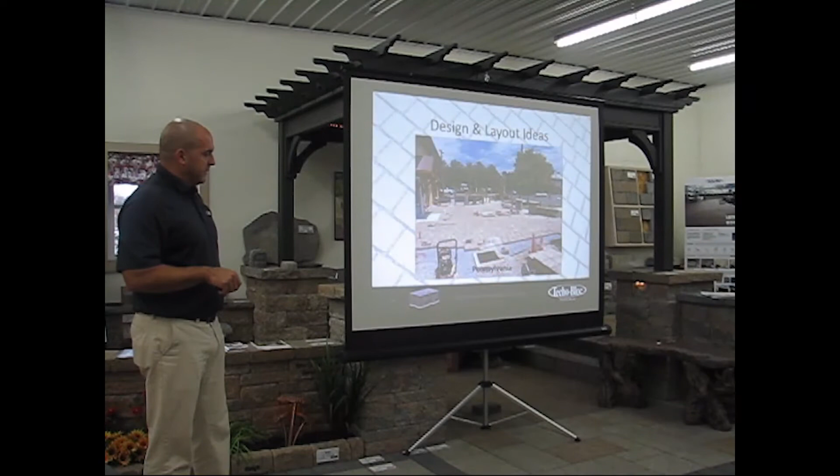Intercourse - yeah. You can see here it's permeable, but they're putting in an inlet just for emergency cases. Typically it's designed for the 100-year storm, so when we get more rain than that, it doesn't flood anything - it gets into that system and gets out as well.

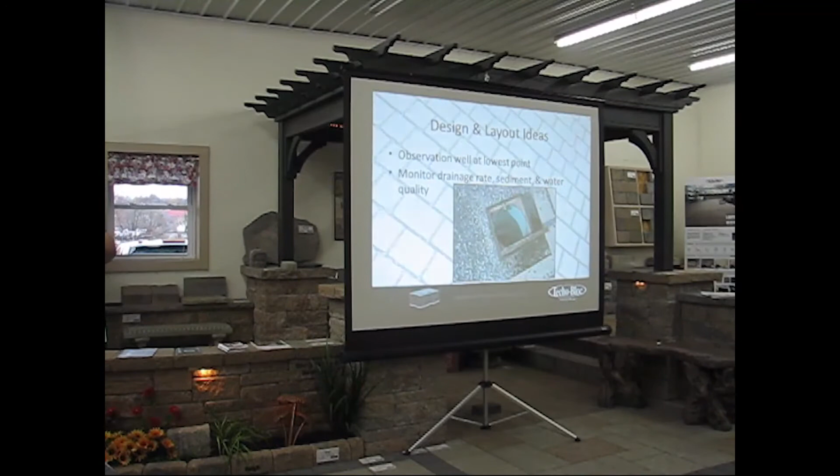Another thing to do on certain bigger commercial jobs is have an observation well, just to see how it's draining, check if there's sediment buildup, and test water quality.

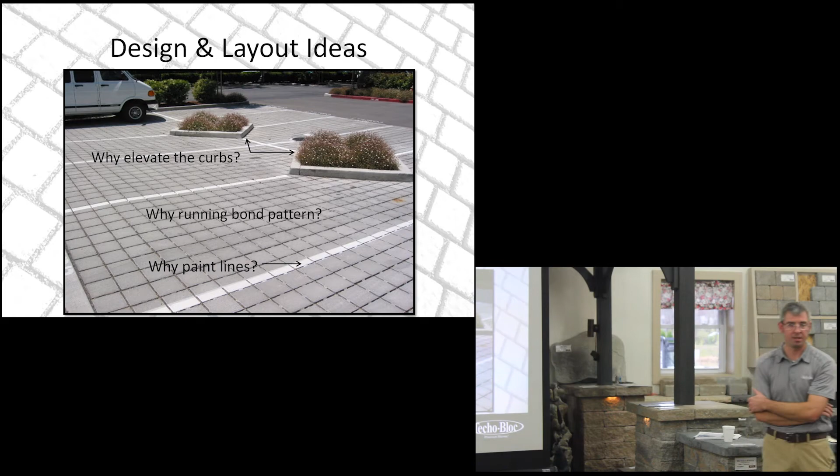This is our plant in Quebec, 400,000 square feet of Inflow pavers, which is funny because we just said don't paint lines - and we painted lines. We manufacture Inflow pavers, just so you know, and there's actually a video on it.

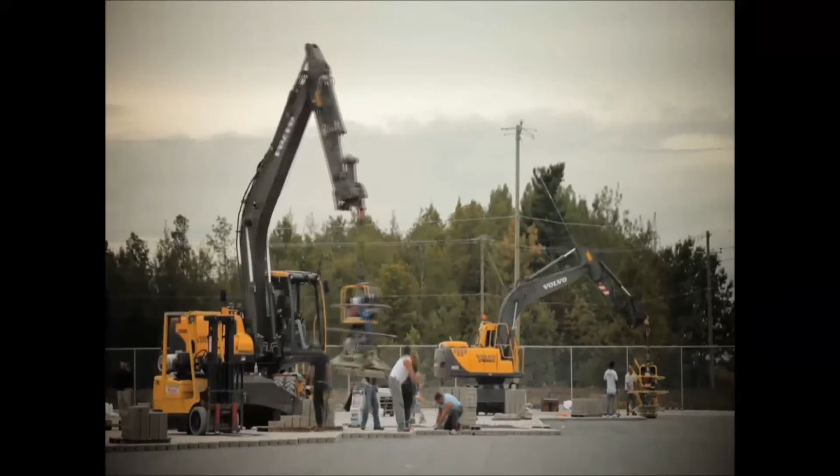After almost 20 years of laying pavers by hand, I'm super excited to be using the new TB100SI by Techo Bloc, a complete standalone unit that can lay one layer, 8 square feet, in a second. Inflow ties those rigid units together. Come on, bring that in. This gives us the ability to see heavy truck traffic in an application you couldn't have in the past. Go ahead and fire it up. Next to me is an ATS system - great piece of technology. We're quickly approaching 100 pallets a day per excavator on this site. They said it couldn't be done. Go ahead - but at 400,000 square feet, Techo Bloc's got a solution. That's exciting production. Only from Techo Bloc.

With that project, some interesting facts - we talk about people accepting the California bearing ratio, which determines how good the soil is. Permeable pavements typically want it to be above 5. There, it's below 3, I think around 2.8 - it's horrible soil buildup.

They would not let us build it. For three years we fought them and said we can build it, we'll make it work. Finally we got enough engineers involved and they let us build it. We have monitoring wells throughout it that they can look at and test. Last year, the city of Quebec, who fought us for three years, purchased 30,000 square feet to use in the city. That's typically how it goes - there's a lot of fight until they get to see the benefits and advantages of it.

Once they do, they accept it and start using it themselves. You saw those big painted lines in the picture? That handles about 100 to 150 tractor trailers a day, plus 30 to 40 forklifts zooming around all day carrying pallets. It's holding stacks 6 to 7 pallets high of pavers, so it's handling a tremendous amount of weight. That's on a turn, so the tractor trailer comes in fully loaded, driving that turn, and they're not always nice and easy when they drive.

Do you know how many ESAL loads it's built for? That would have to be the max - it would be a million ESAL loads, because it's taking at least 150 tractor trailers a day.

Construction sequence - as we touched on before, the most important part is keeping contaminants out as we're building it. Make sure everybody else on the site knows that too, because you can leave and before you know it, somebody drove their machine over it and there's mud all over the system, and it's going to be your job to fix it. It doesn't matter - the installer is always the first one that gets blamed, even if you follow the engineer's spec. They're always going to look at you first if it fails, so it's important.

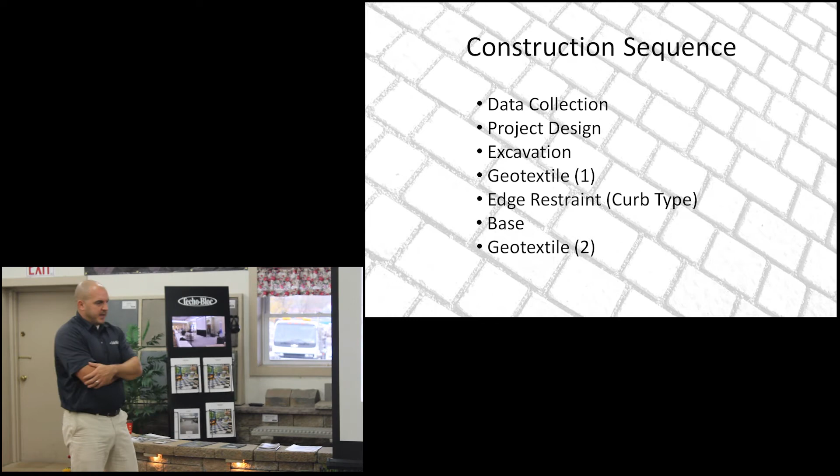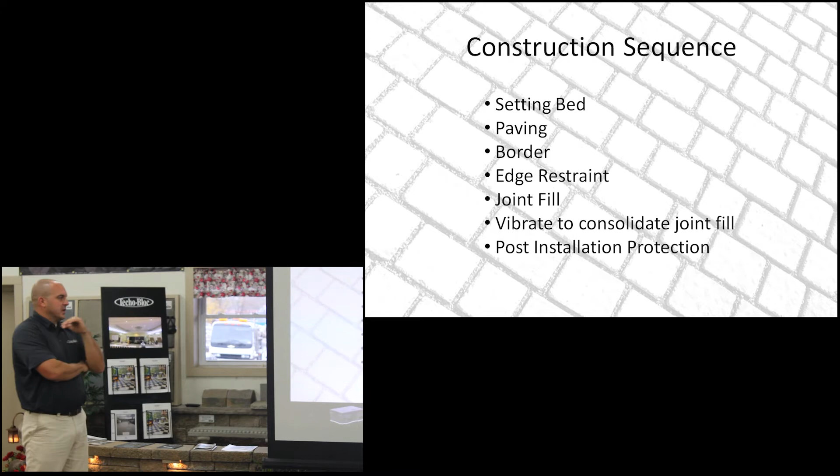Some of the data collection involves knowing the type of soils, infiltration rates, and having a project design. We'll then go through excavation of the system, then install geotextile fabric in between. Edge restraint goes in, depending on whether it's between our sub-base or base. We install the base, optionally another layer of geotextile between our 2s and 57s. We install 2 inches of bedding layer, number 8 stone, then install the units themselves, making sure the borders and edge restraints are in. We'll fill the joints, vibrate to consolidate, and redo that if we have to once they're filled. Typically we want the joints to stay down a quarter of an inch below the chamfer on the paver, and then do post-installation protection.

This project - a little background - it's probably about 3,000 square feet of asphalt driveway, all running towards a garage, so they were getting all kinds of issues with water inside the garage. The garage door was stained and falling apart about 2 feet up from the bottom. So we installed about 400 square feet of permeable pavement in that one area, and it solved all the problems for this guy.

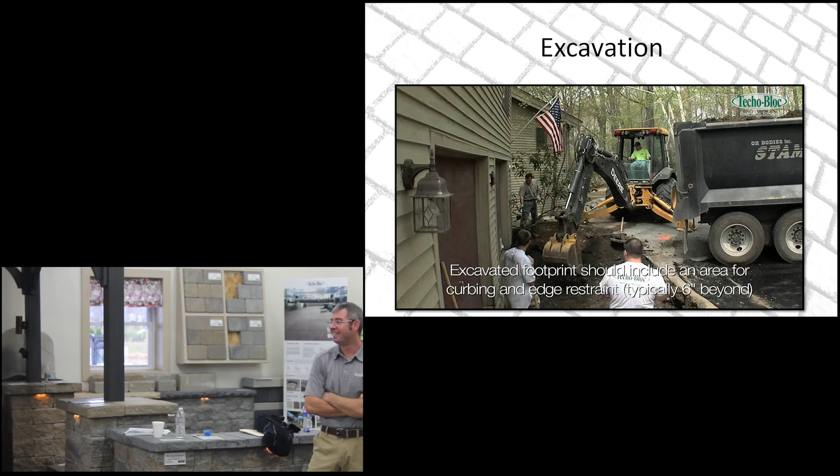Excavate the area - typically you're going to go 6 inches beyond, just like we do on regular interlocking. The rule of thumb with excavation pass and depth is the thickness of the base is what we want to go out past.

Here they're using an extra layer of sand for filtration below our sub-base. Installing the geotextile fabric, you can see how they're lapping it up, encapsulating the whole thing, making sure no contaminants are coming in from the sides.

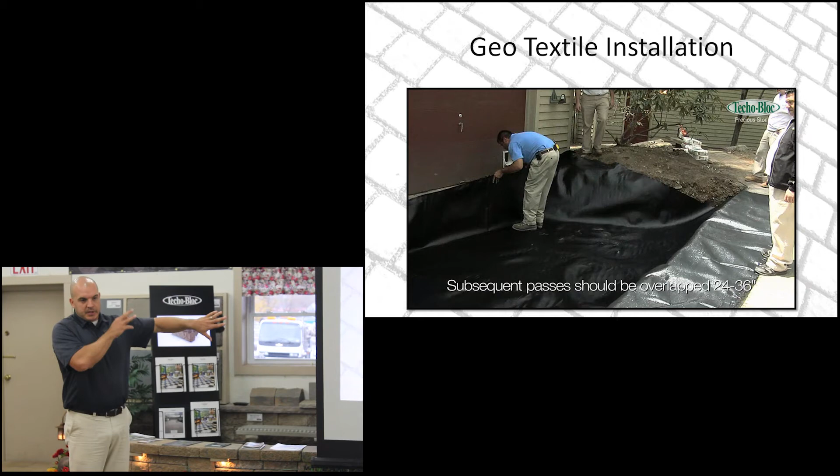There was some waterproofing done against the foundation of the garage also. Just remember, if you're ever going against a home or structure, be careful because there's potential for that water sitting in there to leach into the foundation. So always make sure you put a membrane up or do some kind of waterproofing there. You should see this in our contractor showcase this year. ICPI recommends that within a house that has a basement, you put a 10-foot membrane pond liner to keep water pressure off and actually slope all the water away, so as it drains it's getting off the walls, not getting into the basement.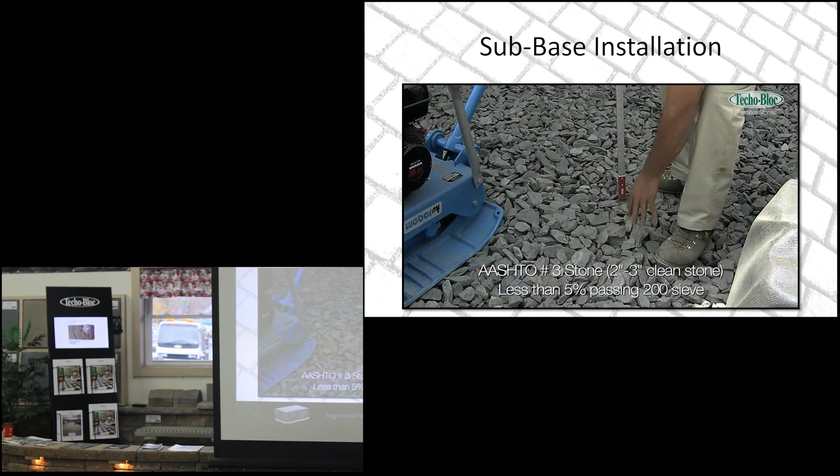Sub-base installation - your AASHTO number 3s, 2 to 3 inch clean stone, less than 5% passing the 200 sieve. Just make sure it's a good washed clean stone, and that's a compactor on it. There's some argument about compacting the open graded stone, whether it's 2s and 3s or 57s, but I will say you need to - at least one pass through to help consolidate those, squeeze them tighter together, and give you a good layer to work off of. It levels the system out as well.

This is installing our exfiltration pipe. Another important thing - the pipe needs to be wrapped with 4 inches of clean stone on the bottom and sides, no matter what, to make sure it doesn't clog the system. Here's some base installation, putting the 57 stone in.

Setting bed is a little bit different with regular interlocking pavement. You're usually using 1 inch outside diameter pipes and screening sand. With permeable pavement, you want to use 2 inch pipes, like fence rails, almost like what they use for chain link fence. Make sure it's 2 inch outside diameter.

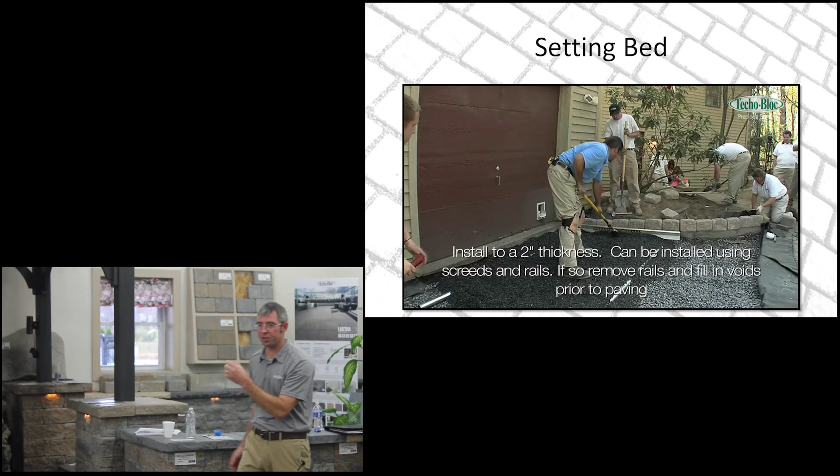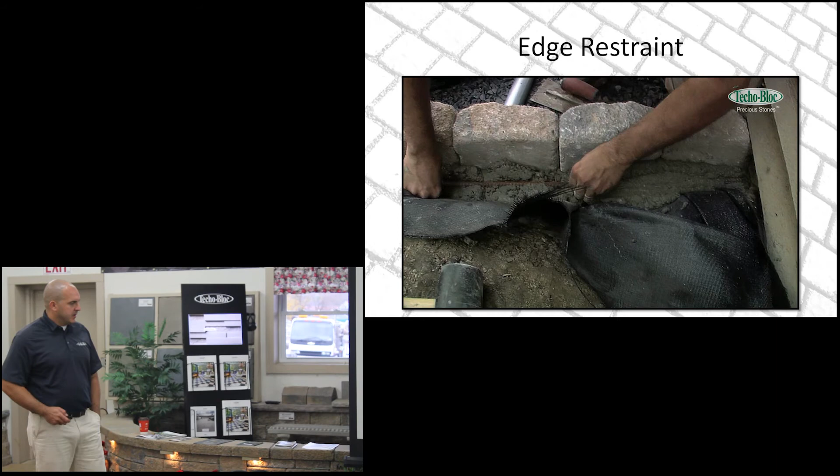Laying the units hand tight. Avoid using pieces smaller than 3/8 of an inch wide, or 1/3 the size of the unit. That's just typical ICPI standards for installation. And here you can see they're putting a solid header course in, like we talked about.

Reinforcing the edge restraint, the curbing, putting rebar in the concrete. Sweeping the stone into the joints, then doing our compaction to get that joint fill consolidated. That's something you're going to have to put in your bid, to come back and put more stone in. Even after you compact it, you come back 2 months later, the stone's probably going to drop about half an inch. So you're probably going to have to go back and sweep some more stone into those joints, even after you compact. Until you get those initial rain events on it, some of that stone's going to wash out the top layers of it. Let's come back.

Maintenance. Like we said, ensuring proper long-term erosion and sediment controls, such as a vegetated filter strip. You want grass growing, or something to bind that soil, as quick as possible. Keeping shedding trees to a minimum. The trees drop those little flower buds and you get all that crap, you don't want that in your system, so try to avoid that. Just look at your system, look at the overhang of the trees, try to think ahead of time where that product's going to be going in.

Plowing. You guys do plow? Go in, you know how dirty that snow gets from scraping. If you can, keep it off the permeable pavement system. If not, that area will probably be one of the first places you'll see clogging, because you're pushing all this dirt to one spot, to the car wash.

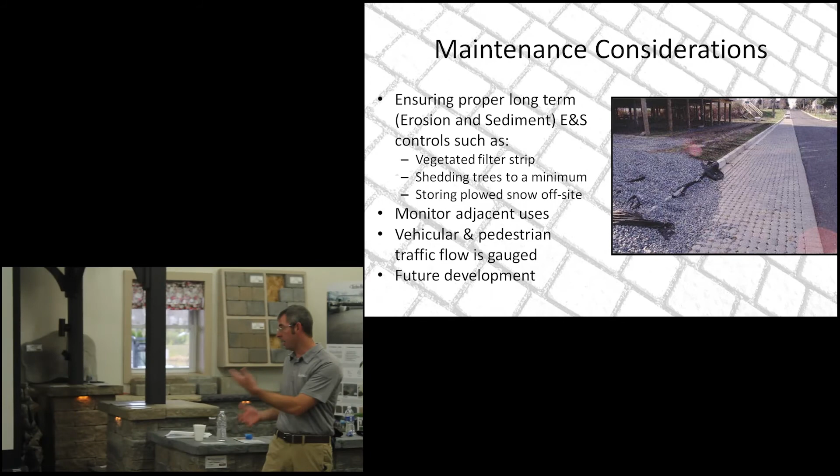Monitoring adjacent uses. Look to see what your neighbors are doing, look to see what other contractors are doing on site. The guy comes in to do some topsoil, do some flower beds, and he dumps it all in your system. You don't want that happening. Just try to make sure everybody's got a clear understanding of what the pavement is.

Vehicular and pedestrian traffic flow. Make sure you know what that's going to be in future development. Like Rick said, here's a perfect example, this goes over a couple of them. One, we're putting in a new building here, here's the construction entrance to it. It's going right over permeable pavement, so the traffic goes in and out all the time, right over top.

The other thing about traffic use, this is impervious asphalt here, all slopes right here on it. So depending on what system you want to check, this system has a better chance of clogging than the parking lot, because it's also collecting all the debris and dirt coming off of the impervious asphalt right onto it.

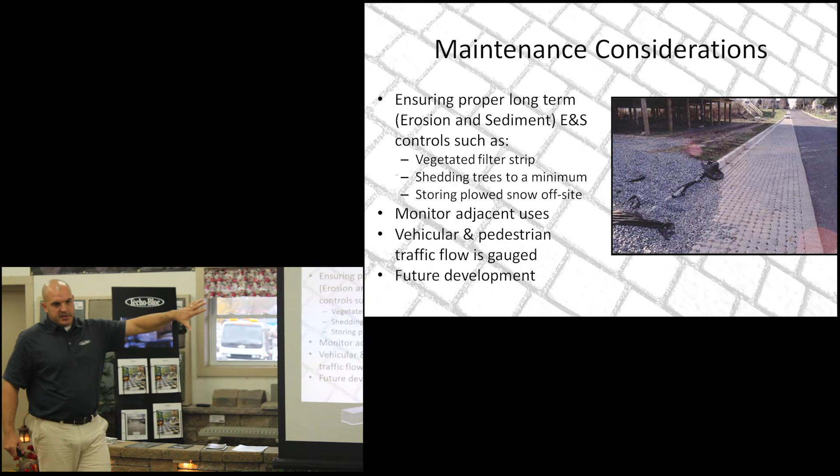Maintenance checklist: visually observe the permeable pavers. In all honesty, you have it in your contract that it's probably annually, maybe biannually, you go out after a rain event and check it. That's all it's needed, it doesn't need to be maintained before that. If we don't see puddling, there's no point in cleaning the system because it's not clogged. And we know once it does clog, we can easily clean it, reinstate the stone, and it's back to working again.

But again, monitor adjacent uses - if a percentage becomes clogged, in your contract you can say, I don't know, 15% of the pavement area becomes clogged, that's when we'll do the cleaning. We rent the vacuum machine, clean it out. Residential driveway, you can probably use a shop vac or a pressure washer. Blow that aggregate, get it agitated, get it out of those joints, and then clean it off and reinstate the joint material.

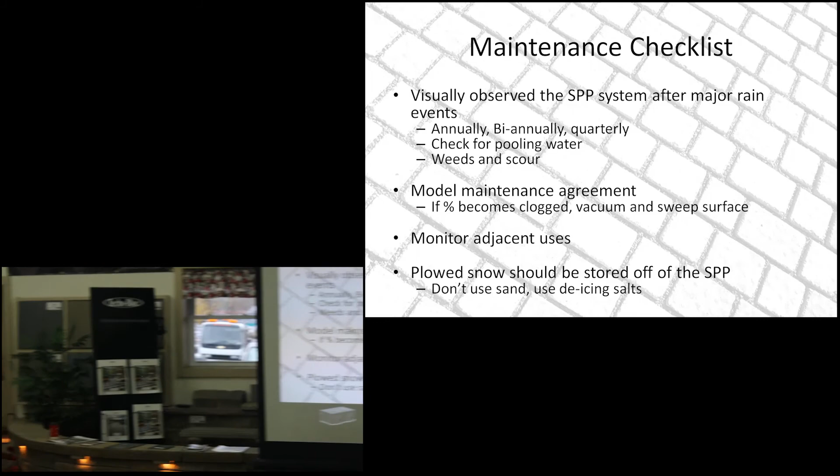Plowed snow shouldn't be stored on the pavement. Like we said, all that filth, all those cigarette butts, everything else you're going to find in that plowed snow - once everything melts, it's going to go right into the joints and you could have a clog right in that area. So try to store it on something non-permeable, on the asphalt or in a grass area maybe.

Again, how to maintain these. Typically, the contaminants are trapped in the top half inch—99.9% are stuck in it. So we know we don't have to worry about the system clogging underneath that. The joining aggregate can be agitated, removed, and reinstated. Once cleaned, it's almost at full permeability again.

Just saying again about porous concrete and pervious asphalt, those have to be maintained several times a year just to make sure they don't clog.

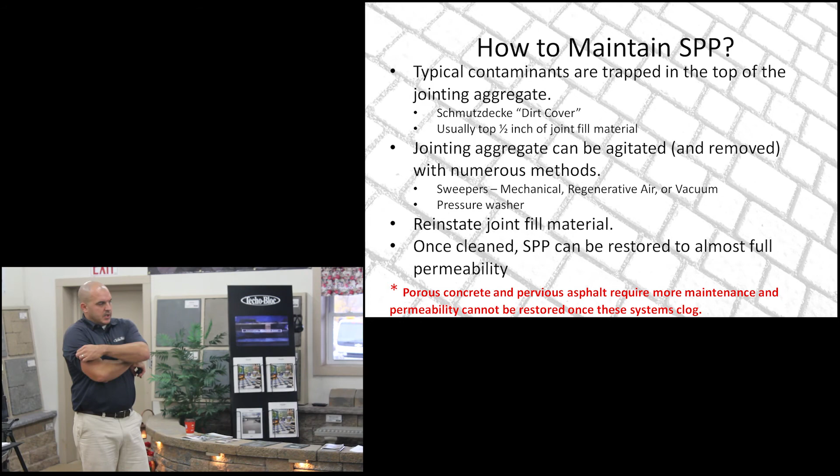There are different types of sweepers. There's a mechanical sweeper, which basically brushes and agitates the material. It's picked up and sent up to a conveyor. That's good, but probably the worst way to do it.

The regenerative air sweeper pressurizes air along with brushes to bring some of that contaminant and dust up, then it's sucked up through a vacuum where it's actually pulling it up through the system. That's the best one, the vacuum sweeper.

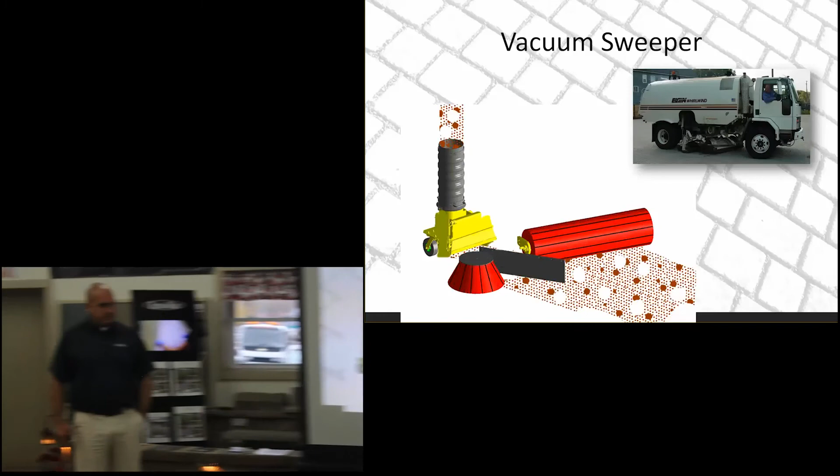And obviously this is for bigger commercial projects. You'd have to get something like this involved.

Any of you guys do commercial projects?

You can get LEED points for doing it. There's a possibility of 5 points from doing it—3 are on the pollutant removal side, and 2 are on the local aggregate side as well.

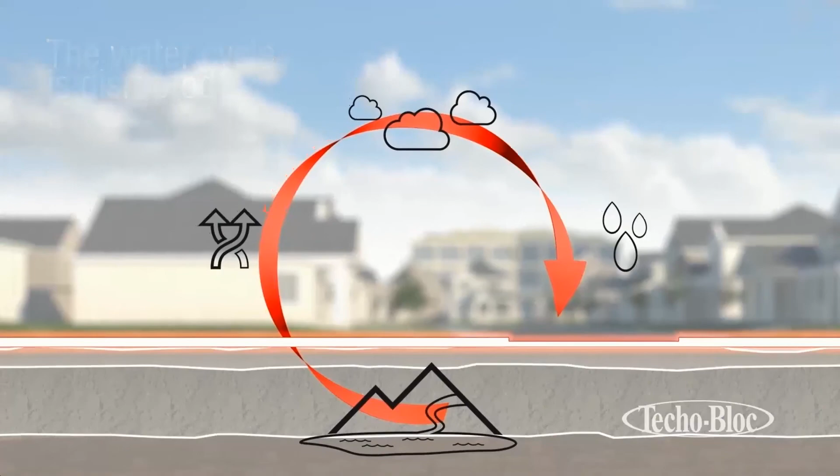Over the past few years, cities and suburbs have become larger and densely populated. Areas that used to be covered by vegetation have now been replaced by infrastructure, parking lots, streets, and sidewalks. The absence of these natural surfaces has greatly disrupted the natural cycle of water. The excessive use of impervious coverings has left cities with the challenge of managing increased runoff volumes, bank erosion, flooding, and the degradation of water quality. Today, these problems pose considerable risks to the sustainable development of cities and suburban areas. It's a serious matter that requires immediate attention and a viable solution.

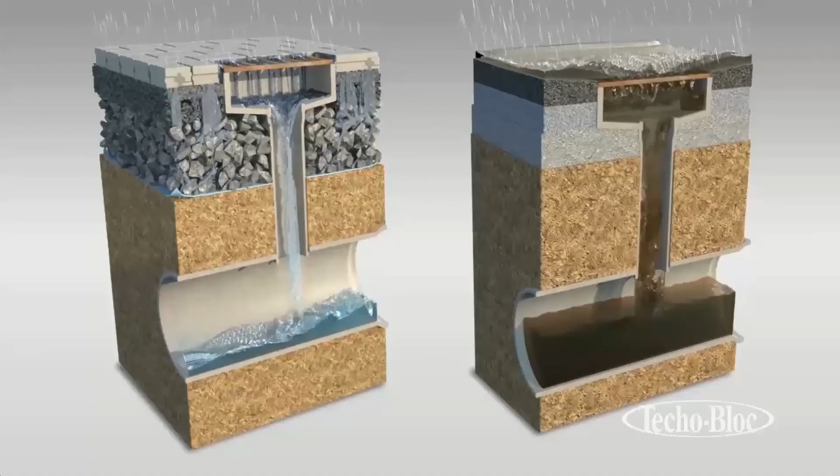Permeable pavement is a simple and lasting solution that imitates the original hydrological characteristics of natural soils. Its primary function allows runoff water to percolate through its joints while being filtered by different layers of aggregate prior to returning into the soil. This helps reduce the volume of rainwater runoff, thus reducing the strain on stormwater management systems.

The reduced demand on stormwater systems helps avoid overloads, debris buildup, and potential flooding. Permeable pavement improves water quality and helps groundwater recharge. It also reduces the heat island effect and can be used where vegetation is not suitable.

Permeable pavement can also be an integral part of the water management system. Its use can help decrease underground infrastructures and retention basins, resulting in an overall reduction of costs. Permeable pavement allows an increase in lot usage and building opportunities in public and private development projects. This helps governments focus on reducing life cycle costs associated with wastewater management in their municipalities.

Available in various sizes and colors, permeable pavement can complement any architectural design or concept. Permeable pavement has been extensively and successfully tested as a sustainable and cost-efficient alternative in a vast array of applications. Permeable pavement is the ideal solution for cities and communities faced with stormwater management problems.

Keeping all these advantages in mind, Techo-Bloc has designed Inflow, a permeable pavement system perfectly and specifically suited to urban and suburban conditions. The Inflow system is perfectly designed to withstand the harshest of conditions by combining Techo-Bloc's landscaping expertise and the benefits of permeable pavement.

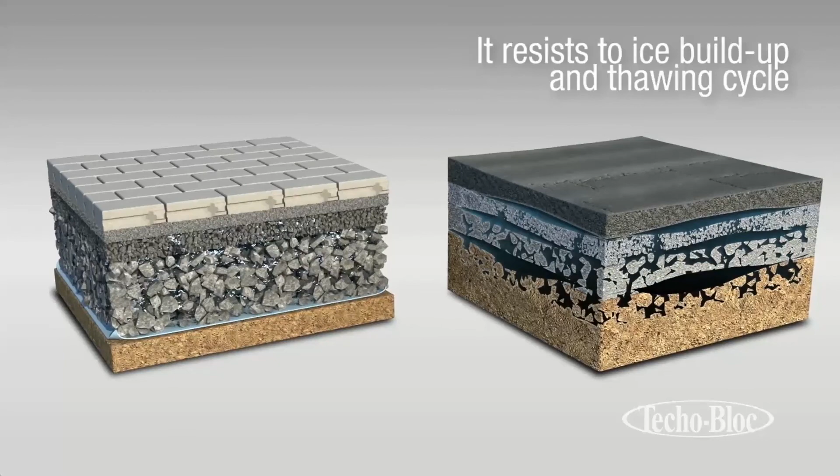Thanks to its tongue-and-groove system, Inflow can handle the weight and vibrations common to extreme industrial transport. The void spaces of the Inflow layers have been designed to hold vast quantities of water and resist ground displacements caused by ice buildup and the thawing cycle. It also reduces the need for de-icing agents.

Inflow is designed to cover large surfaces, and its mechanical installation capabilities are simple, quick, and cost-efficient. Its durability and resistance to adverse conditions also make its maintenance simple and cost-effective.

Inflow is available in a wide range of colors and designs that can suit any concept developed by the most innovative architects. Inflow contributes to achieving LEED certification and is promoted by the EPA as an efficient LID system. Its specifications comply with the latest standards required by cities and governing bodies.

Inflow, the durable solution for your pavement.